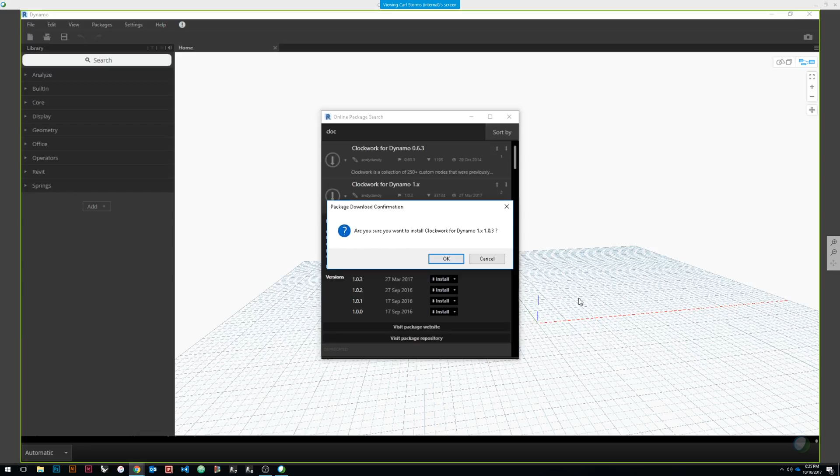If we decide we want to download that package, we simply hit install, and it asks us to confirm. We say OK, and it fires up and brings it down, doing some downloading for us. As it goes out into the web and finds that information, we get a little drop box that pops up telling us it's downloading.

Now, one of the things we find, particularly working across this interface called WebEx, is that sometimes it takes a bit slow. Anybody that's done scripting, or in this case Python scripts, it'll let you know that's involved and ask whether you want to continue. Of course we do. Then we get a gray dialog box letting us know it's downloading. Once the download completes, it turns blue and shows installed. If we go over here, we now see I have Clockwork installed in my Dynamo.

If we go back and look at manage packages, it tells me the two different packages I currently have installed, as well as the version. If we click the three little dots, it gives me some information—I can uninstall, I can show contents. If you click show contents, it tells us all the nodes included inside it. Clockwork has 370-some odd nodes, so there's quite a few in here.

So if I'm looking for a particular node, I can now search for it. I can also say show my root directory, and sometimes this comes in handy because it takes you to where it's actually located inside your local drive or database, where all the information is stored.

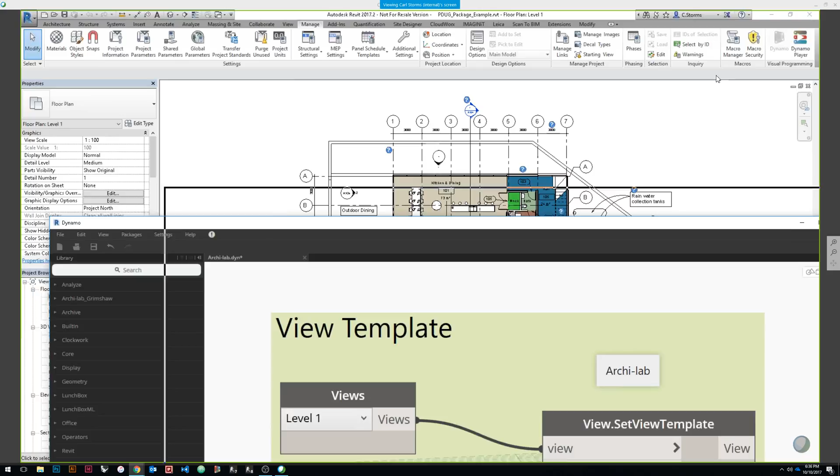Basically what I'm going to do is take all of my level 1 views and change them with our view template. I'm just going to throw this down here so we can take a look at what our level 1 view right now looks like before I run the template. Let me flip my screen so we can sort of see both.

Go ahead and hit run, and you'll see that it applied the PDUG view template. Again, not earth-shattering, but you can sort of see the benefit of doing something like this - very simple. You can set up a script, run it through the Dynamo player, and have this applied very quickly to multiple views inside of a project. Or if you're setting up a template, you can do this very quickly in play.

When you run a script inside of Dynamo, it affects Revit, so whatever's happened has happened. If I were to close out of Dynamo, whatever changes have happened have stayed there. This also means that we have the ability to simply undo a script inside of Revit as well and have it go back.

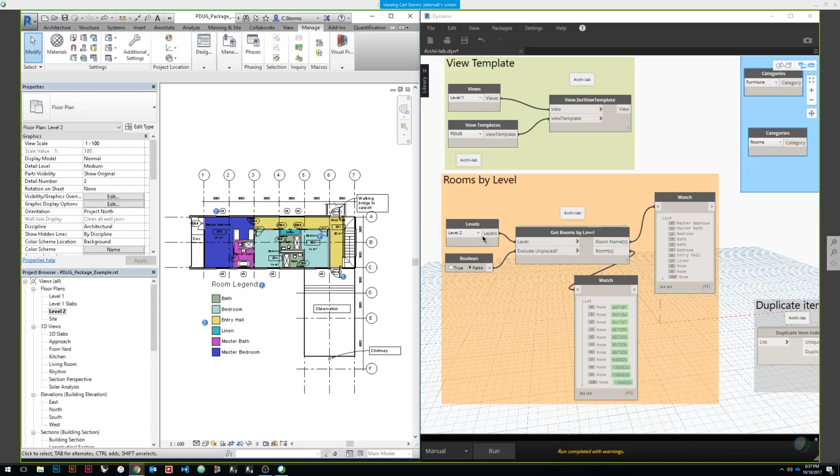The next thing that we can do, as we can see here already, is pull a bunch of room information from our project. All this simply does is go into the interface, and if I switch over to the second level, it pulls our information in. Right now you can see I ran it and went to my second level. It pulled out - what do I got - 11 different rooms.

Currently I have the exclude unplaced default. Let me turn that back on and run it again. You'll see that my list got shorter because it excluded the unplaced rooms from inside that project.

So if I had a bunch of rooms inside of my project that aren't placed, I obviously wouldn't want those on my list for whatever reason I'm pulling that information out - whether it's to put inside an Excel schedule and send out to somebody, or I need to know the information. All of that content is easily attainable with this one particular node.

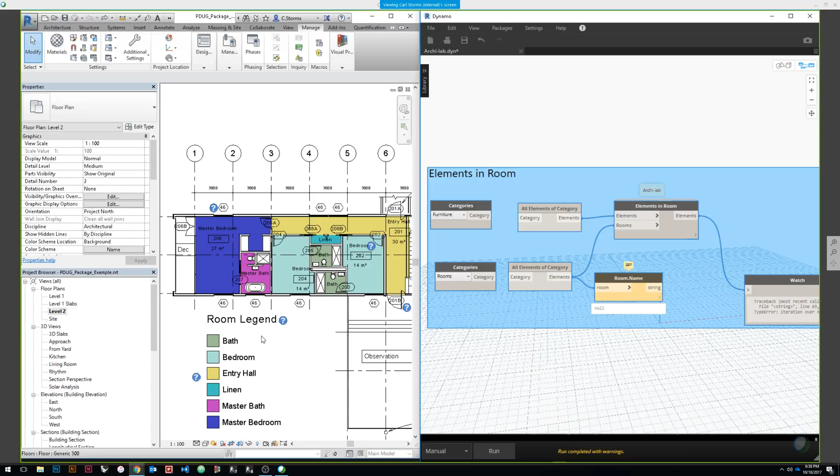This one's also pretty cool. What this allows us to do is find out what is actually inside these rooms. So if I go back to my first level again, pull up, and you can sort of see that we have definitely got some furniture

inside of our rooms, kitchen and dining, living. So if I take the furniture category and connect it up into my elements, and then take my rooms and connect it up into my elements, and then run this graph now, you'll see it's gone through and pulled out a list

of all the room names, but also over here it's given me a list that matches. So as you can see, if I go down my indices, when I get to index number 7, which is the kitchen and dining area up here, you'll see it's telling me all of the content that is inside of that room. So just because these elements have an insertion point that's inside of the room, it now knows they belong

to that room, and it's pulled all that information out, and we now have access to it. Go down to 11, that's our living room, and you can see it's pulled in the information from our living room as well. So again, a quick little node that gives us the ability to pull information that comes in place. You can imagine that if you're doing a large project, say a hospital, and you need to keep

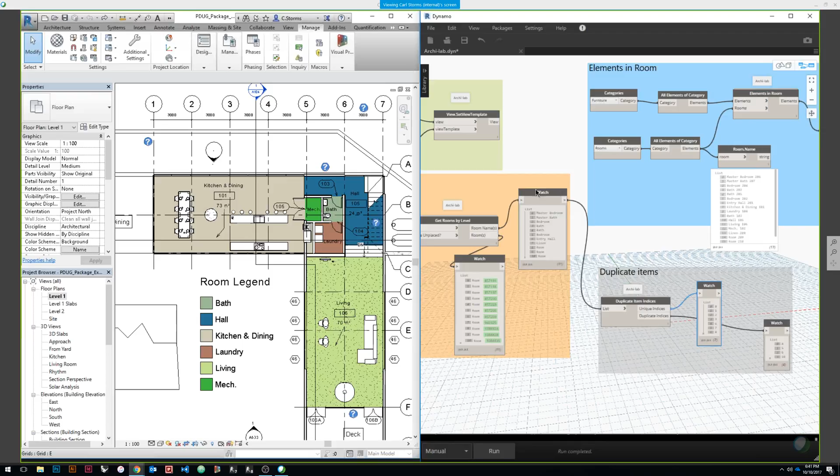And if I just scroll back here and take a look at my original list, you'll see that number 8 is unique. And now it's just going by the name, so it's called room. The first one is the unique one. And you'll see over here that 9 and 10, which are also called room, are not unique. They're a duplicate of that original.

So again, a handy little node that allows you to pull things that are duplicate out of the list very quickly. And then once you have that information, the world's your oyster with what you want to do with it.

All right, so let's take a look at the next essential package. I'm going to close out of this. And the next one is Clockwork.

Now, you've probably heard this said multiple times, I've said it many times at conferences, that while working with Dynamo is visual programming, you don't necessarily need to be a programmer to work with it, which is absolutely 100% true. However, having a logical mind and understanding how programming works and some of the things you'd find when doing coding is essential. Some of those things that come with the Clockwork package, as you see in my little group here that I've stuck together as math, are just simple things we can add that aren't out-of-the-box nodes that can make your life a little bit simpler.

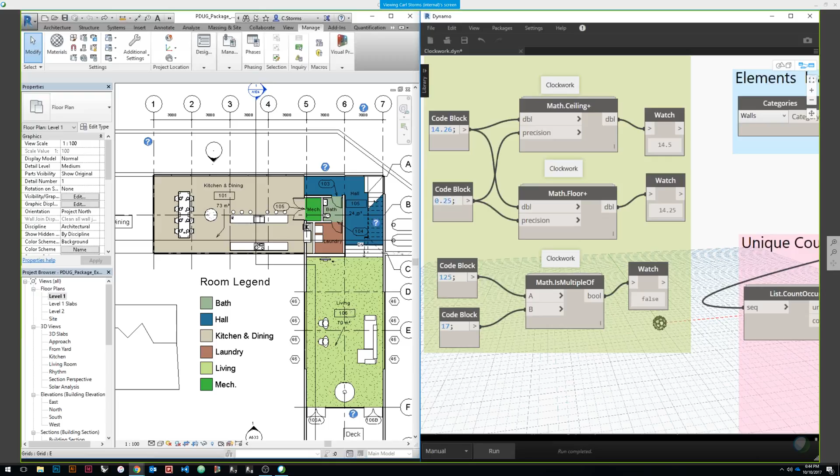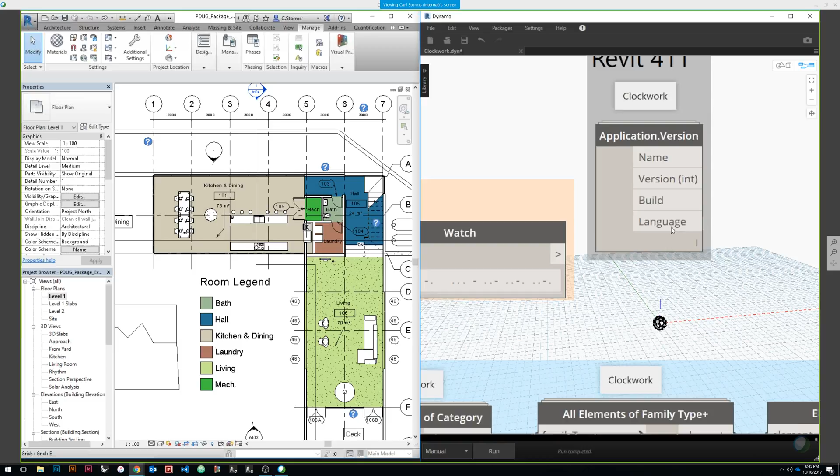Another thing that's pretty cool: anytime you see one of these nodes like this one, where there are no inputs, it just automatically goes out and reads the information. So this went out and read the current version of Revit that I'm using. If I hover over it and open up the list, you'll see it tells me I'm using Revit 2017, the version, the actual build, and the language. Sometimes this comes in handy if you're checking a whole bunch of different content and want to know where it came from, now you have the version information.

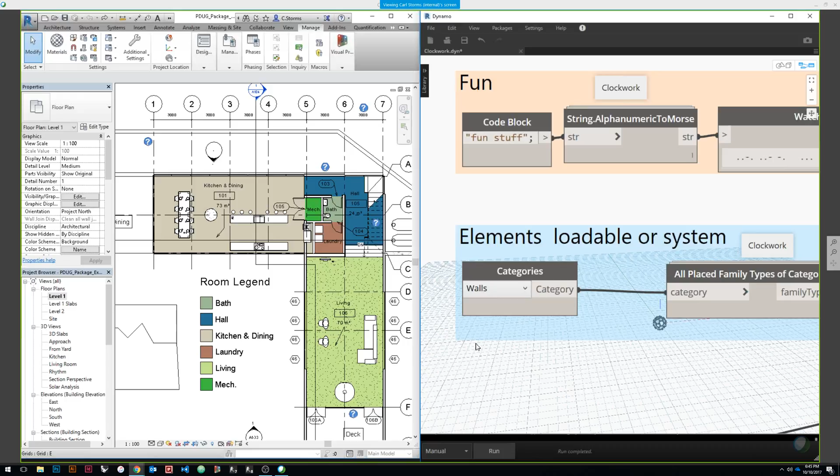This one's also pretty cool, the ability to pull elements, whether they're loadable or system. That's a big thing because by default, it's not super easy to pull system information out of Dynamo. It's usually just loadable, like furniture, doors, that sort of thing. So what I've done here is take the walls category and bring it into All Placed Family Types of Category, pulling in all of my walls. I've got all elements of family plus, which means it doesn't care whether it's loadable or system family, it pulls out all the information. If I run this again and hover over it, you'll see it shows I now have all of my wall types, pulled out of the project, which is pretty handy.

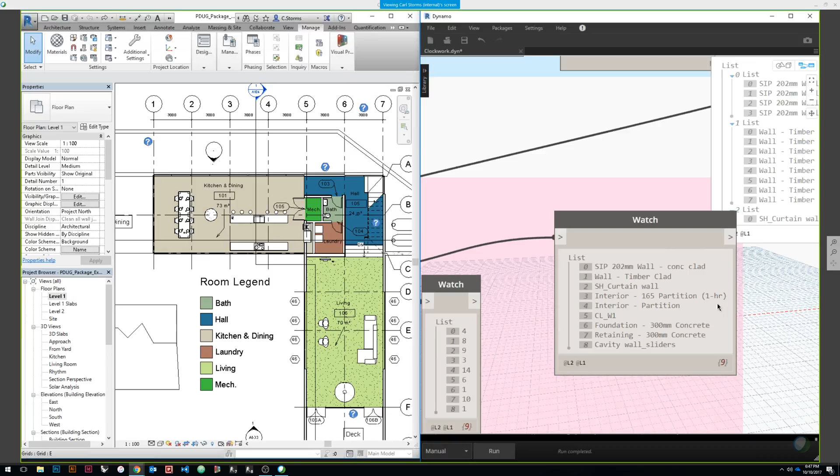Another node I use all the time is List.CountOccurrences. What this node does is two things: it takes a list, in this case our list of element names, which are all of our wall types in the project, and splits it into two categories. The first is our unique elements, telling me the 9 different wall types I have in my project. The other tells me how many occurrences of each one I have. So how many occurrences of my timber-clad wall do I have? That's index number 1, I have 8 occurrences of it. My cavity wall sliders, I've got 1. My CLW1, which is index 5, I have 6.

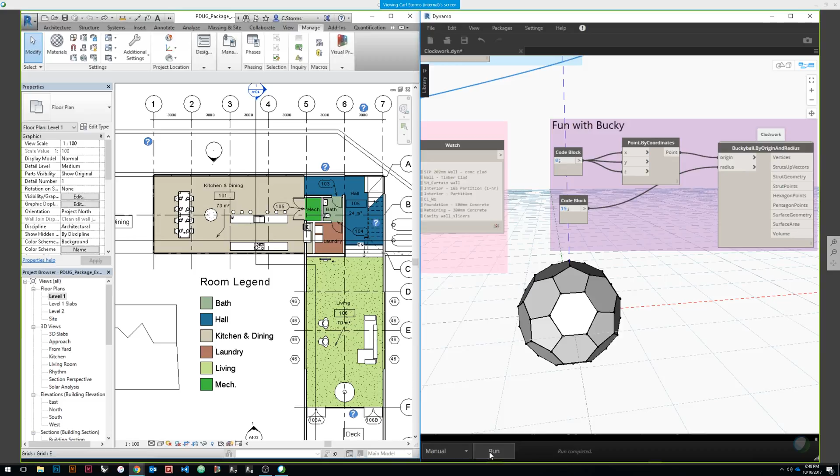And this works with any list you can input. So you can see how that can become very handy, especially combined with something that allows us to have elements that are loadable or system. You may have seen this little shape going around in the background, this is what you call a buckyball. This is another fun thing we can do: pull it into the project, and this node from Clockwork takes all that information. I throw in a radius and run it again, now I'm going to get a much bigger buckyball in place so that I can play with. Maybe not the most practical thing, but cool nonetheless.

So that quickly winds us through the world of 2 of our essential packages. Let's carry on to number 3.

Now we're going to fire up Lunchbox. A couple things that come in handy here: as you're working away inside of Dynamo, you may find that you end up with the dreaded null, no information. A lot of times if you're trying to get a list, having nulls in there is going to cause you a problem.

So what this node from Lunchbox allows us to do is take the nulls and replace them with whatever we want. I quickly put together a random list of numbers and names and all sorts of stuff inside a code block, and then said replace the null with 'null no more.' I go ahead and run that script, and I now have a new list where my nulls have been replaced with 'null no more.'

Probably not what you would actually use, but you can see you have the ability to replace that null with whatever it needs to be replaced with to make that list usable. Out of the box, there are definitely nodes, one called clean, that will just remove the nulls from the list altogether, and sometimes that's what you want, but sometimes you need something a little bit more.

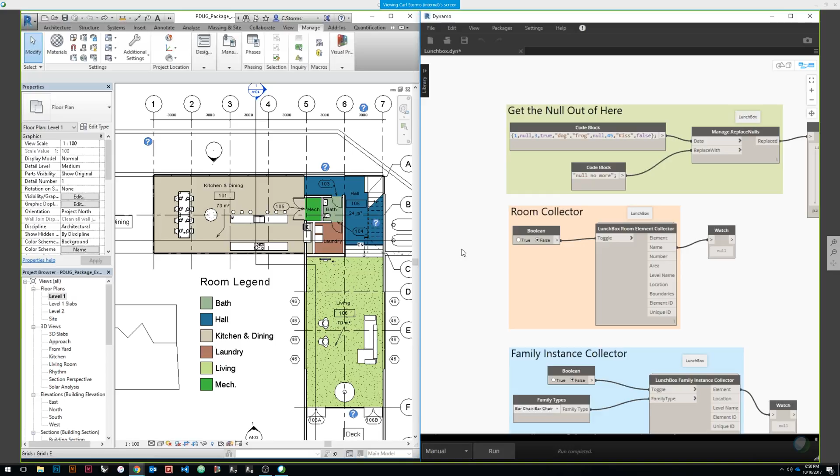Some other cool stuff we can do with our friend here, the lunchbox: room collector. This is a really cool node, and a lot of these collector nodes that different people make inside of their packages are super handy because they gather a whole bunch of information, and they allow you to, at any point, gather information. The only input required in this case is a toggle, to tell it whether or not you want to actually run that information.

So if I turn my toggle to true, and I go ahead and give that a run, the first thing you'll notice is that it actually pulls the information into my project. So now I have the rooms inside the project, so we have access to the geometry of the rooms. But more importantly, you see we've got the names, numbers, area, unique ID. Any of that stuff is now at our fingertips, and we have the ability to pull it in and take a look.

Likewise, we can now do similar things with family instances. As you can imagine, this will collect information on instances of families inside of our project. Again, two inputs here, whether or not it's true or false, so true will activate the node, and then family types for the type of family we want. So I've chosen our bar chair, which are these little guys up here.

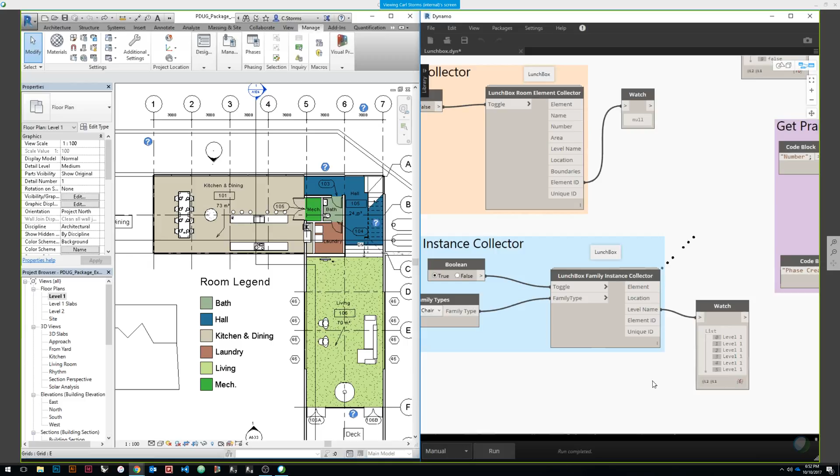Select that to true, run it, and you'll see that all of the information about my rooms is now gone because I turned that to false, and now I just have the location of our chairs. You'll see I can change the element, the location, the level they're on, unique ID, element ID—all of that information is now available to me from this one simple node that collects all this information. As I change things inside of the Revit model, run this again, it pulls in that information.

So we've always got the latest and greatest information in regards to that. We also have the ability to get parameter values, so that means we can pull information from any parameter inside of our element.

So I pull my element, and I'm just going to run this guy again to get my room information. Now I've got all of my room information. I run again, and I now have all of my room numbers that I want, when it was created. Wrong one. That's it, there we go. Brings in the information. So again, a way to pull values and parameter information through that's not quite the same as what we get with out-of-the-box nodes.

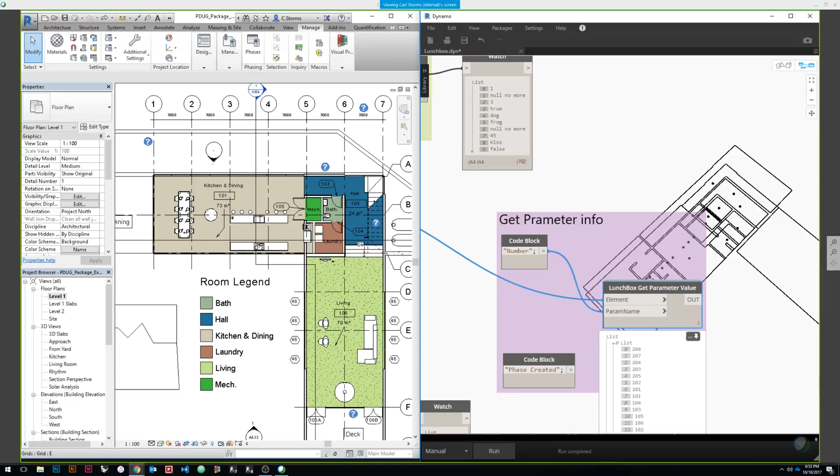Lunchbox has been around for a long time, so this is just a very small sampling of what you can get from there, but it gives you an idea of some of the things you can use, perhaps on an everyday use case. Three down, two to go.

Now we're going to take a look at rhythm.

So a couple things here. First, what we like to call a teachable moment. As people that create these packages make updates, adjust for newer versions of Revit, make changes, you'll see from time to time you may find that you had a graph that worked awesome, everything in it was perfect, good to go, and then you go open it up and you get this. Anytime you see a red node, that means that node no longer exists.

So that can mean two things. One, I don't have the rhythm package. But because this one isn't red, and because if I scroll down here, you see I do have the rhythm package, so that's not it. So the second option, once we found out that we do have the package, is that this came from an older or newer version.

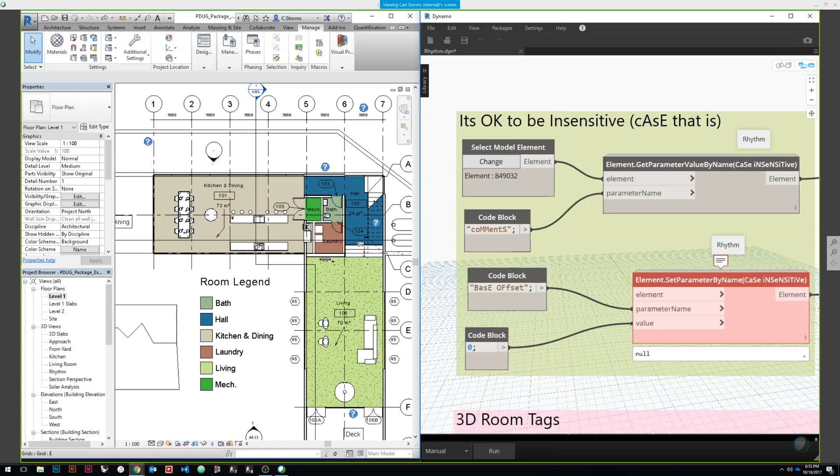But I thought I'd leave it in so that if you ever got a red node, you understand what it's about. The other one is still in play. And what I like about these ones, as you can see, is that they're case insensitive, so whatever the parameter name is, it doesn't matter.

The majority of times when you're dealing with this, you have to make sure the parameter—in this case comments—is exactly right. So even though I've spelled it all weird this way, if I go ahead and hit run, you can see that the comment is PDUG, which is the wall I've selected, and it tells me the information. If I go back into my Revit file and select the wall, you'll see in the comments, PDUG.

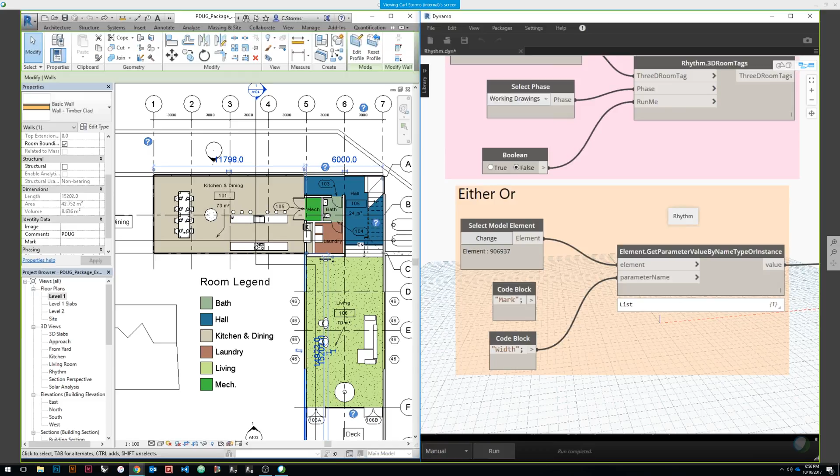Another one that's pretty cool is this guy here: get parameter value by instance or type. Comes in super handy because it will get the parameter no matter whether it's an instance-type parameter or a type-based parameter. So in this case I've selected a door, and I put in my mark parameter, hit run, and you can see it gives me the mark.

So this guy right here—if I change it to width, which is a type parameter, hit run, it gives me the information. I select edit type, pull it over and scroll down, and we see that we've got our width here. So again, doesn't seem like a big thing, and yes, out of the box you can get type-based information and instance-based information, but this one node allows you to do both. It's one node that gives you two times the information.

This one's pretty cool. What this allows us to do with a family—when you download the rhythm package, I'll just quickly show you. When you download the rhythm package, inside the extras—this is it right here—is the 3D room tag family that you need to make this next script work.

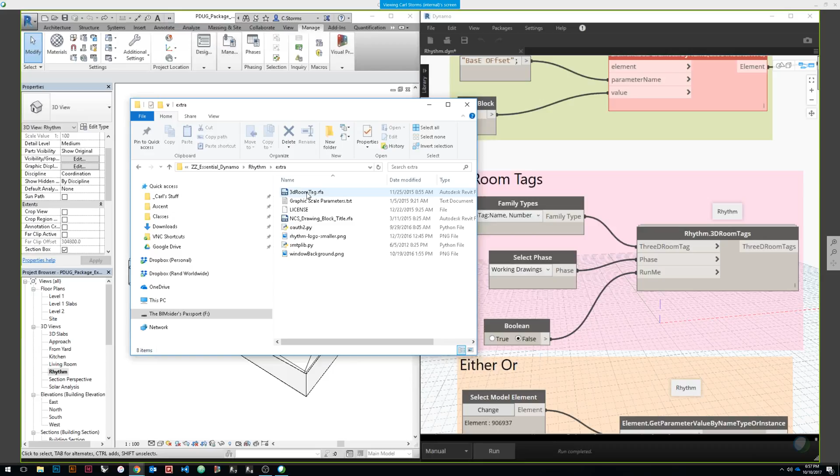Essentially what it does is take the information from the out-of-the-box room tag, in this case the name and the number, and creates it with 3D text so you can see that information in 3D. So as you can see right now, no room names, no numbers. Level 1, we've got our names and our numbers.

I go ahead and change that to true, run it, and we now see that we have our 3D names and numbers inside of a room. So again, you can see how this can become handy for a presentation view, showing the client we want to see the 3D stuff, but we want to know where we're working. We have the ability to take a look at our 3D room tags.

Something else that's kind of cool is the ability, in this case, to update or change our arrowhead design. As you can see, it can change just about any arrowhead that you want—text notes, tags, room tags, door tags, window tags, wall tags. All you need to do is give it the arrowhead type. Now this is just a simple string input.

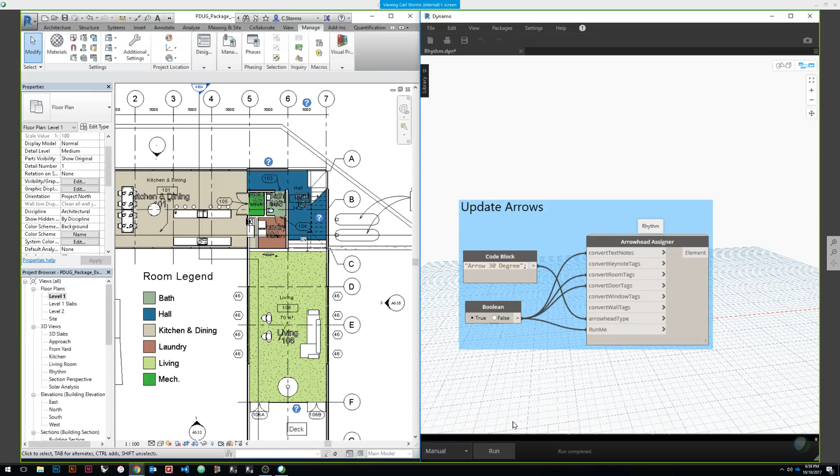So you just need to have the name of the arrowhead as it appears inside of Revit, and then we of course need our Boolean to tell it true so it runs. We scroll in here a little bit to see a bunch of arrowheads. Run. And of course, if I used a different arrowhead, let's try 15 degrees, and they change to 15 degrees. Again, not an earth-shattering difference, but it allows us to show what we've got in there.

And if I were to go into... now we've got our filled, so it changed the rooms, changed the doors, and also changed our text. So again, perhaps you need to change a bunch of arrowheads really quickly—there you go, you're set up and off to the races. Imagine going through all the different views inside a large project trying to find that. That's a couple clicks and you're done for the entire project.

All right, one more to go.

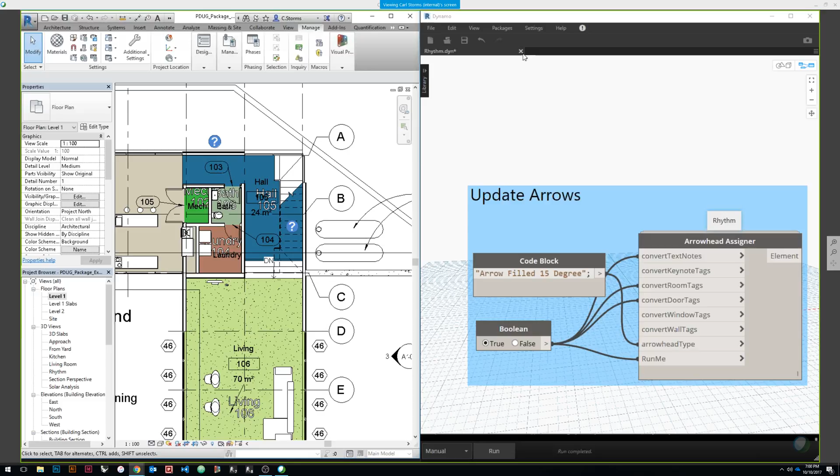Oops, I didn't mean to close that.

Give me one second. And the last one that we're going to take a look at is Spring Nodes.

So a couple things - perhaps you're the person in charge of taking a look and keeping things up to snuff. Once your Revit files start to get really big, we may have a problem. So now we can see how big a file is, and this one has nothing to do with the actual open file that I have.

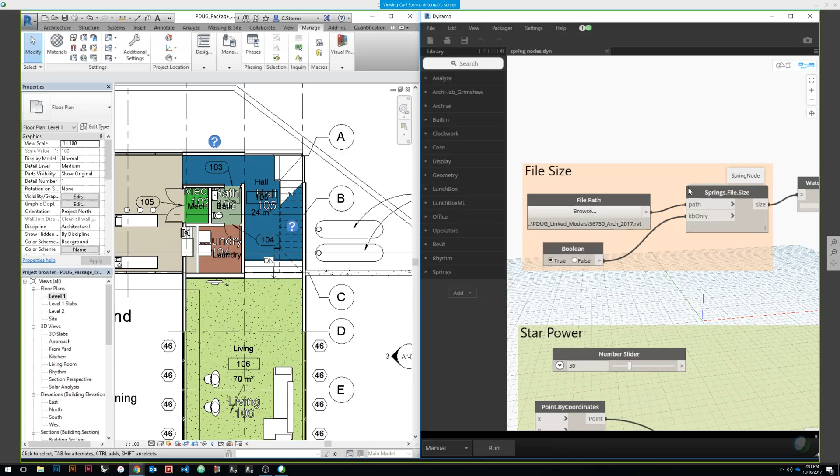We actually just browse to wherever our Revit file is stored. In this case, I select File, and I say Run. And it tells me the size in kilobytes - 29 megabytes, that's fine.

We're good, but if you get up into gigabytes or 400 or 500 megabytes, perhaps it's time to take a look. And you can see I didn't have to open up the Revit file to do that - I could open the script and check a whole bunch of files very quickly by just pulling it through and running it in the background.

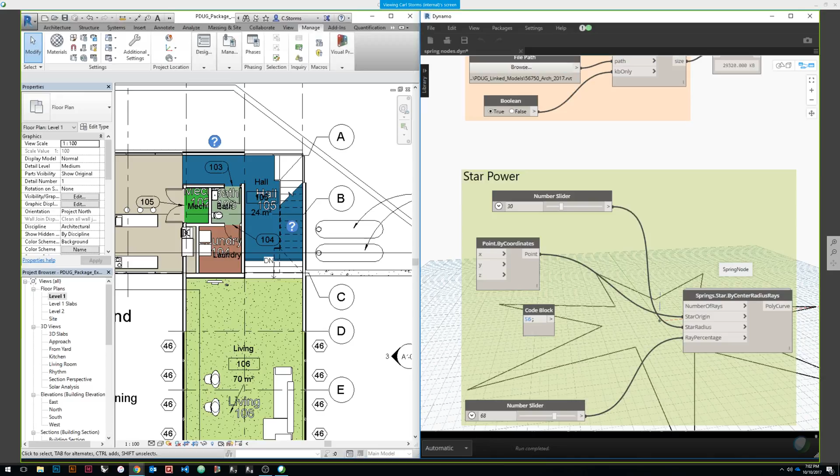Something else, a little bit of fun - you can probably see in the background here, I've got this little star. I can start tweaking around, throw this on automatic, adjust the star, adjust the radius. Again, some of these probably don't have the most practical use, but it shows you some of the stuff that you can do with Dynamo - pretty much the sky's the limit. Plus, I think it's kind of pretty cool.

This next one's pretty cool as well. What this allows you to do - since I don't need this, I'm going to make this full screen now - is it allows us to actually take and review a Revit interference check from the exported model. So you go into Revit, you run an interference check, you can export it out as an HTML file. This will run that HTML script and tell you all the information about it.

In this particular instance, I can browse through and check one of my HTML files. So I've got a couple of different ones - this one's about walls. I say OK, I hit run, and it tells me all of my different things - the clash categories. I'm clashing walls against railings - do I have any issues? I don't have any issues. There's one case where I do have walls running into railings, and there's 2 clashes.

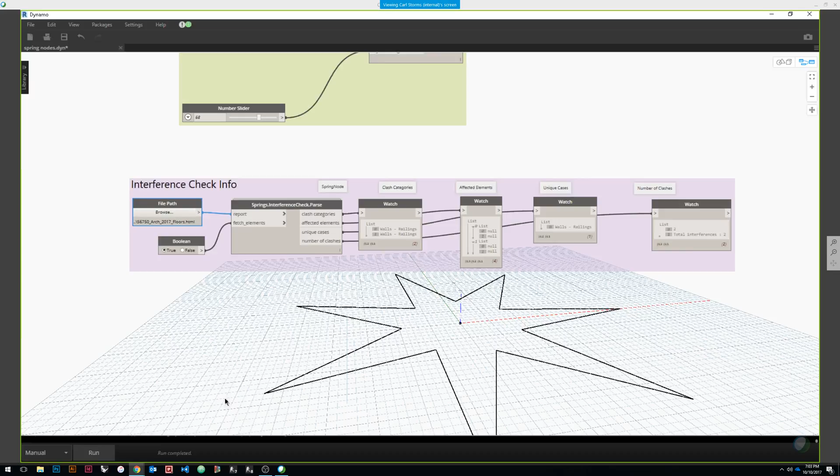And if I go back to my floors option, run that again, you can see that I now have 7 different issues. I have floors running into stairs and floors running into structural columns. I have some issues with floors and stairs - 3 clashes - and some issues with floors and structural columns - 4 clashes. Now, 'clashes' is kind of a hard word, at least for me.

Usually when I think clashes, I think of some of the stuff that we can get working with Navisworks. The interference checker inside of Revit is not meant to replace Navisworks and doesn't quite give you the same functionality, but it does give you some rudimentary information.

As you can see, I clearly have some structural columns that are interfering with some of my floors. Now I can make that information - I can run this again. This is one of those things that you could run in the background on a weekly or monthly basis to take a look at it and have it sort of as a dashboard type of thing, instead of actually going in and running a report inside of each active project.

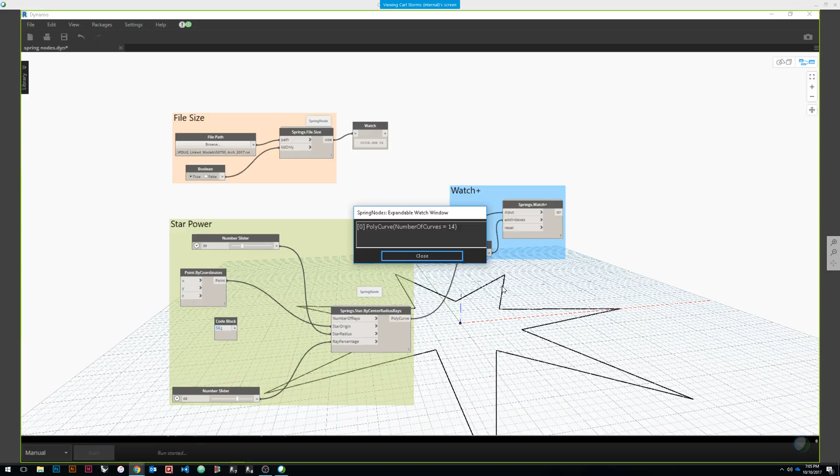Another thing that this does is allows this Watch Plus to take information and take a look at it. So if I were to pull, let's just say, my poly curves - it's not that exciting, but what this does is it allows us to give a pop-up expandable window. It doesn't seem like a big thing, but sometimes it's much easier to read and get the information out from this. I come down and I pull out the information from within my clash categories.

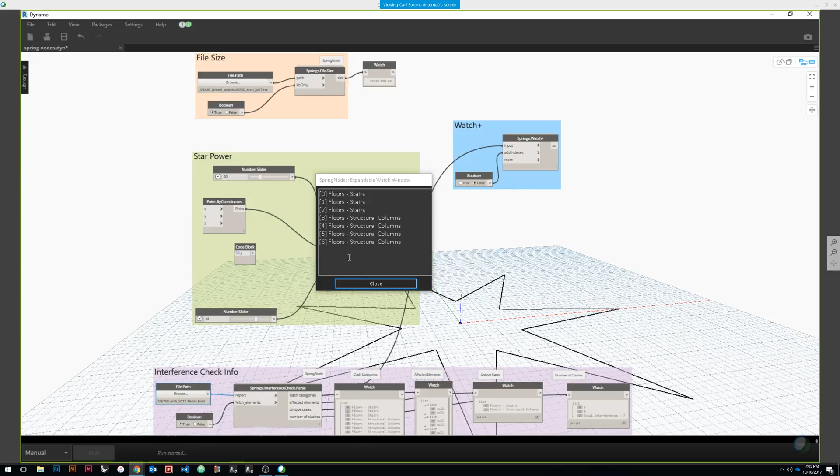Again, I put that in there, go ahead and run it, and I've got my information. I can resize this window for whatever purpose I need it to be. I can also turn on or off the indices - so as you see right now, I've got 0, 1, 2, 3, up to 6. If those aren't needed for whatever reason, I can turn off the indices, run this again, and I get the same pop-up without that information. So again, it's just a way to have a different output or display of the information that we're running through Dynamo and take a look at what it is and what it does for us.

All right, so that is our 5 essential packages.

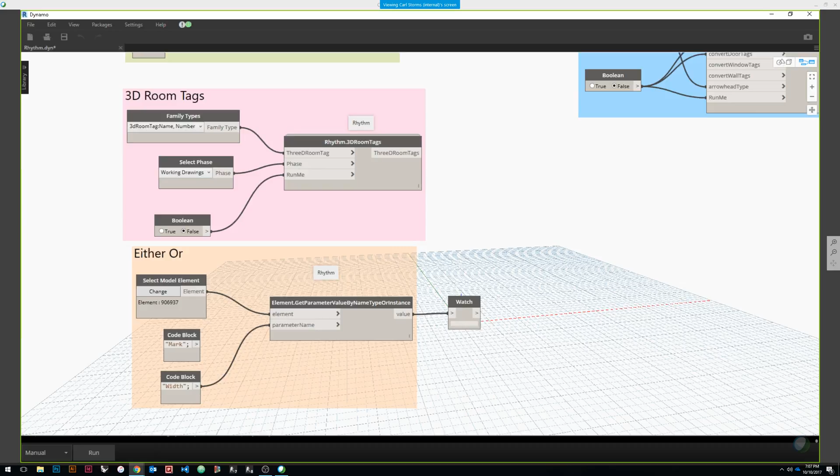Was there any other questions? Can you pull the file path of the current Revit project through a node? Is there a node that does that? Yes, there is. Off the top of my head, I can't remember which one it is. I believe it's in the Clockwork as well. They've got a whole list of ones that pull that, as well as, or was it Lunchbox? Now I'm forgetting. But yes, I know there is, in fact, a node that does that. That'll pull the file path of where your particular current Revit project is stored. Thank you.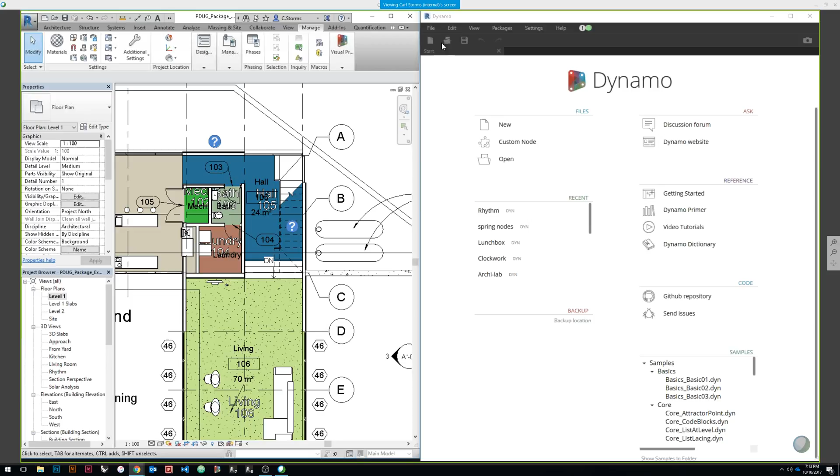All right, we're good to go. Let's open up the ampersand. You'll notice that I now have many more packages installed. That's what happens when I swapped over and brought in that other location. It pulled in all those other packages that I have installed.

Now, this particular package really has nothing to do with the Revit file that I have open, so I'm going to make it full size. This package is done by Colin McCrone, who does a lot of great stuff with Dynamo, and he really does a lot of cool things when it comes to panels and panel visualization. This is just a small bit of what can be done with his nodes and his knowledge.

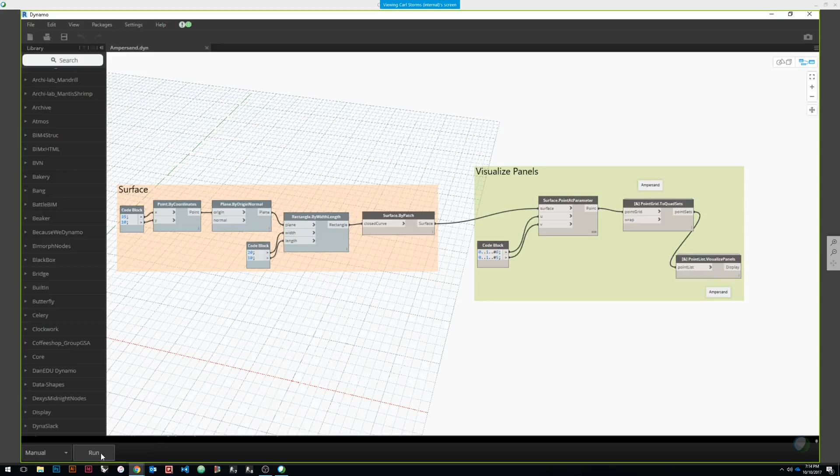So if I quickly go ahead and run this, down here in the background, you'll see we now have a list of panels, 8 by 5. You'll also notice that we have some wash. What's happening is the actual surface, or where the panel would be, is in conflict with the color.

So what we can do is we can just turn one of them off. If I just go up to my surface by patch, right click, turn off the preview, then it turned off those grays, and now you can see a little more clearly where each particular panel represents or lives, because there is a bright colored 4-point square rectangle, if it didn't have to be square, which these ones are, to show you where that is.

One of the few things that comes from that ampersand package, but it's one of the ones that I find most useful, especially if you're working with facades or panelization. And again, plenty more where that came from if you check out Colin's class or any of his talks, any of the many conferences he's been at. But that is ampersand. You'll see up here a bunch of different stuff inside of ampersand.

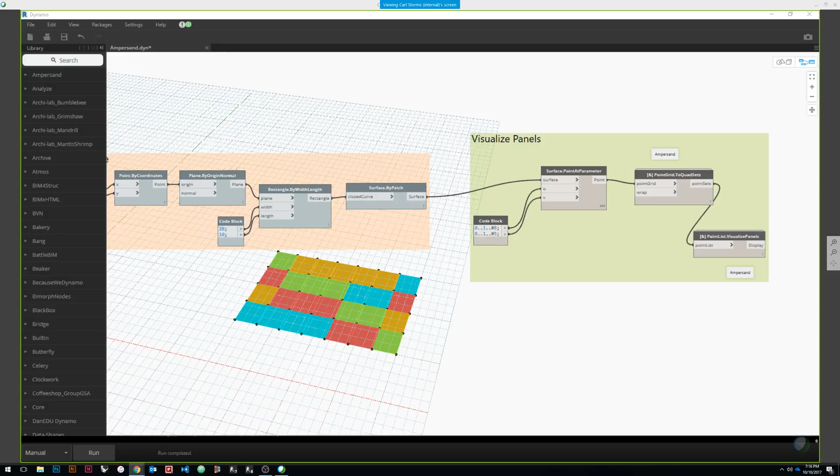So next is bakery. Bakery is a package put together by Luke from What Revit Wants. Bakery is huge, it's right around the 500 node mark. It used to be dependent on a whole bunch of packages. I think it probably technically still is. And every time you had to update it, it was a real pain to update it.

What Luke has done, and it's different than any other package I've come across, is that when you download it - I currently have it installed, so you see there's a whole bunch of different libraries or locations where I can put this in here - when you download it, you're only going to see one node. There's only going to be a single node. And when you click on that single node and put it inside your graph, it's going to give you instructions on how to actually install the package.

Once you've installed the package, the node goes away. But it basically tells you where to find the package you've downloaded and how to take it out, unzip it, and put it in the proper location to have access to all the nodes. So if you download Bakery and think, why is there only one node and nothing there? Put the one node on the canvas, run the graph, it will walk you through, and then you'll have your 500 plus nodes available to you.

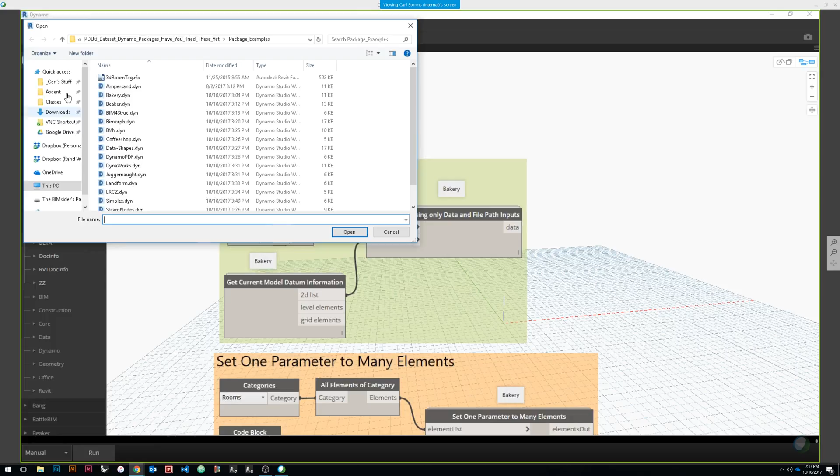Some of the stuff we're looking for is information about what's going on with our particular project. So what this does is write an Excel file with a bunch of information about this project. All you need to do is first browse to where you want to save the file and give it a name.

The next thing is pull the information that you want - all of my grid elements, all of my level elements, or just my 2D list, so all of my 2D content from the project. I go ahead and say run, it's going to fire up Excel, and it pulls up this Excel list of all this information based on this particular project I have in place.

Now, it's a predefined set of information, so some of it may be useful, some not. You can see we've got some of those dreaded null values in place. But basically it's telling us our project base point, are there any grids - we've got our A grid, B grid, C, D, E, F, and G, level names, elevations, and our start points. We can sanitize this list as we go through to make it more palatable, but you can see what we can do when we pull that information out.

If I close this out and try my level elements instead, it's going to pull up that same thing, and now it's giving me all of my level information - where each level is: level 1 is at 0, 2700, 6000, 3000, 800, 5500. So it's giving us all of our level information. You can see how this node could be very quick to pull this information - I call it quick and dirty document information - to pull that stuff out of your project, get a look at it, and have it in an Excel spreadsheet so it can be easily shared.

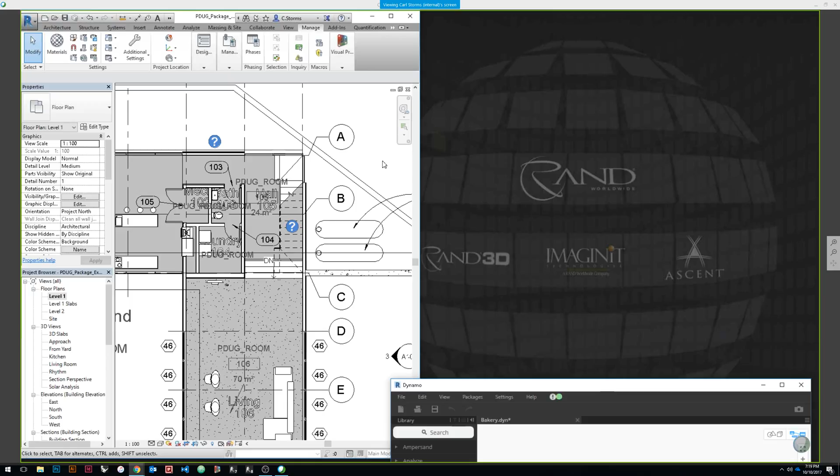The next one's pretty cool. It allows us to put a whole bunch of information at once. So we select one element, we select the parameter that we want to change, and we change a bunch of parameters at once. Let me take this back and place it. Let me unrun my script so we don't ruin the surprise. But we see what we've got here.

So what I've got on plan is I've taken all of my rooms, and I'm going to change all of the names. So every name is going to be PDUG_ROOM, and of course it's the name that I'm changing. I go ahead and run that, and you'll see that all of my rooms have now changed to that name. Probably wouldn't want to use that particular example, but it shows you the power of what it does and how it can change one parameter in many places quickly.

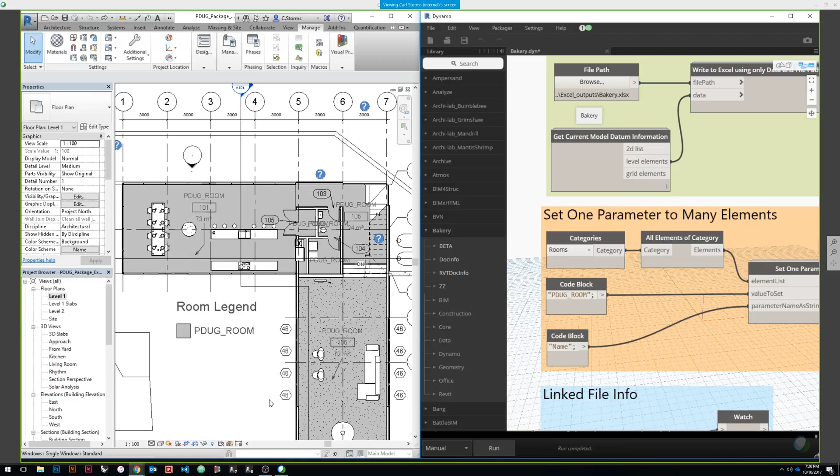So if you had to change something very quickly that happened to occur in 100 spots - say all the chairs went from Herman Miller to Walmart, I don't know why they would do that, but they did - you can change that manufacturing spec of 100 chairs very quickly using that information.

We also have information about our linked file. And where is my linked file? If I had a linked file, which I thought I did, I'll just quickly throw it in here. So now I've linked a project inside here. Now it's not playing nice - the joys of a live demo.

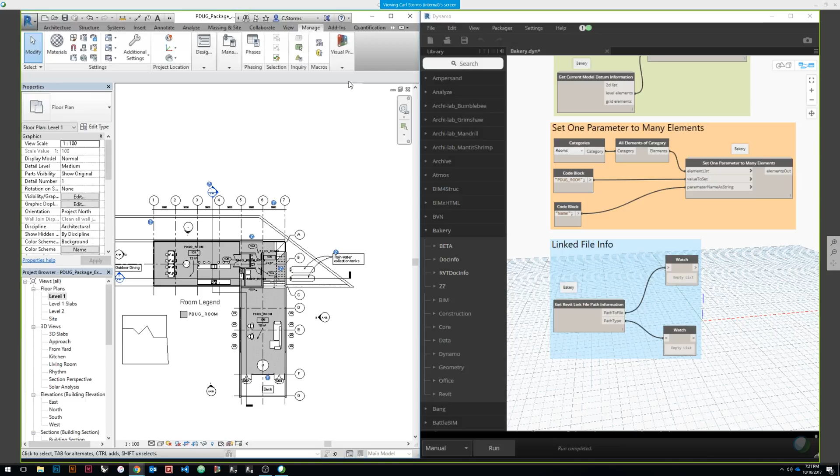But what it's supposed to do, similar to the question we had, except it deals with our linked project, is pull in the information from that linked file, and we are able to see it right away. I'm going to try one more time to make sure that we've got that linked.

There we go, now you'll see that I've got that. That happens from time to time when you're working with a graph—you may have to restart it. But you can see it tells me where that file is located. If I scroll across, I can see all of it, as well as whether it's relative or absolute. So it'll pull through the information, all of the linked files inside your project. If it's a large project with 20 files linked, it would give you the information on all 20.

All right, carrying on. Gonna have to speed up here as I can see we're running out of time quickly. Next one is one called Beaker.

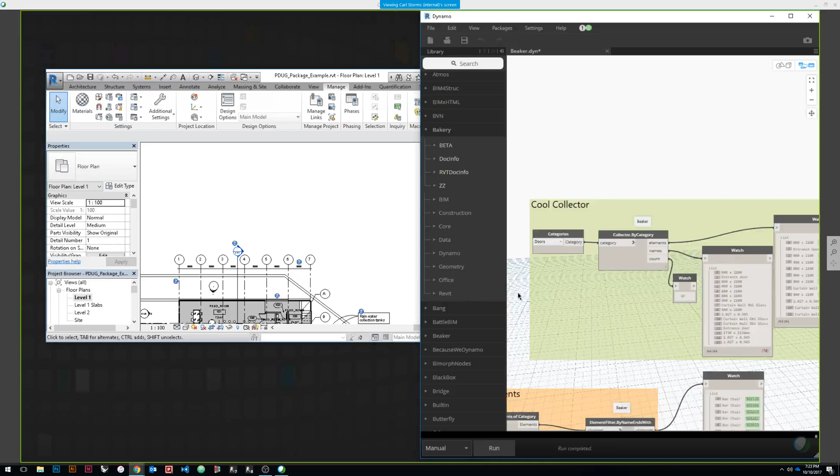So the first one, I call it Cool Collector. It'll collect any category and give us information about that category. I've currently got it set to doors. I say OK, I run this through, and as you can see, it's giving me all of my elements—the name of the door, its actual element ID, the name of each door, and how many doors I have in my project. And that will work for any category, rooms, whatever you want to think of, it allows you to do that.

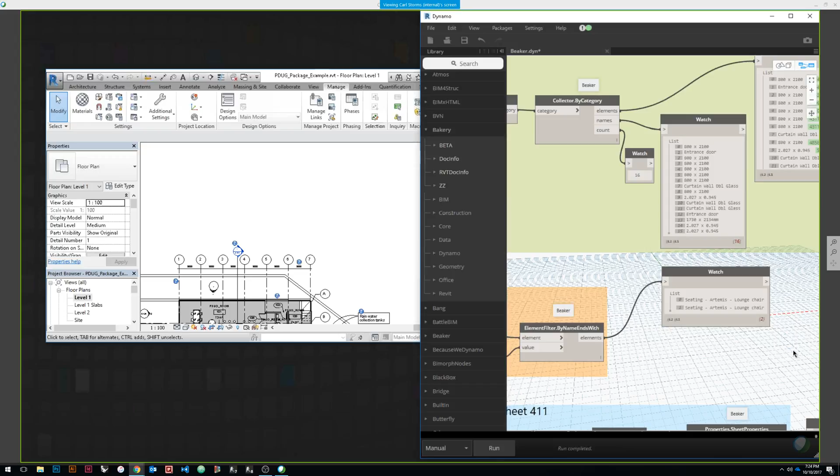Another cool node that allows us to filter things. Whatever our element is, I've chosen category of furniture. The value I'm filtering by is chair. I hit run, and you'll see I have all of the chairs. Now I happen to know that there are a few that have a lowercase c. If I run that again, you can see it gives me the information where there is a lowercase c in that. So it does get filtered very specifically between what you're looking for.

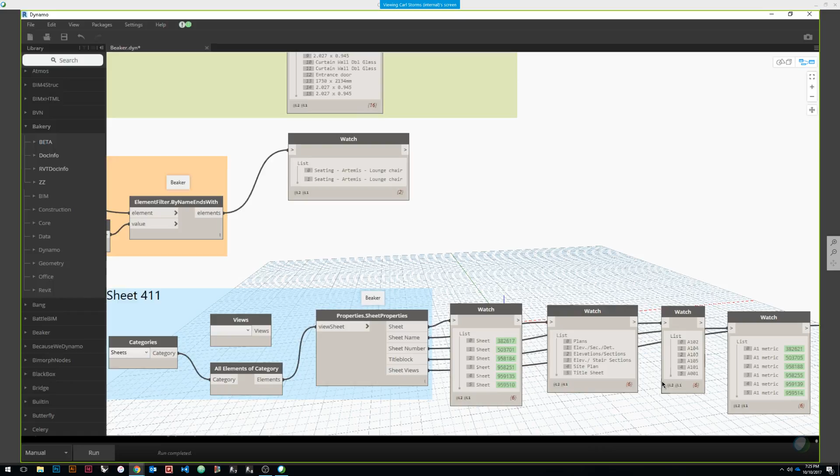Another one that's handy, it's another collector. It pulls out information about all the sheets inside of our project. If I go ahead and run this, you can see it tells us the sheet—it gives me the actual element ID. Sometimes when you're working inside of Dynamo, you need the actual element ID. It gives me the sheet names, the sheet numbers, the title blocks. And it also tells me all of the views that are on each sheet. So again, handy information that you may need when you're creating title blocks, sheets, what have you, all coming from one very handy node.

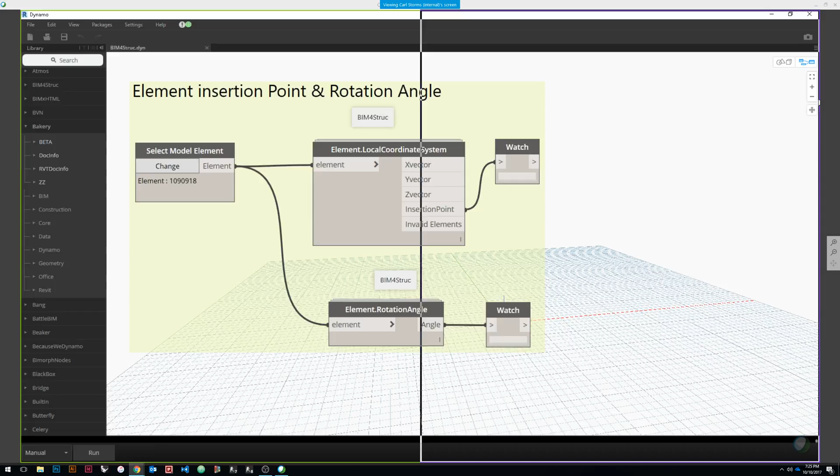The next one is called BIM4Struc. There are 4 nodes that are part of this package. As the name might suggest, a lot of them have to do with working with structural elements. But this one is just a general productivity node, and I think it's kind of cool.

So I can choose model element, choose my model element, run, and then it gives me the information about it. Where's my X vector, my Y vector, my Z vector? In this case, the insertion point. There's lots of times where we need to place something or find out where an element is placed by insertion point. I can also find out what it's rotated. As you can see by my 89.99999, this was obviously created in metric and converted to imperial or vice versa, so you don't have that nice 90 degrees. Quick and dirty, really handy, and finding that insertion point can be very handy as you're working your way through.

The Bimorph nodes.

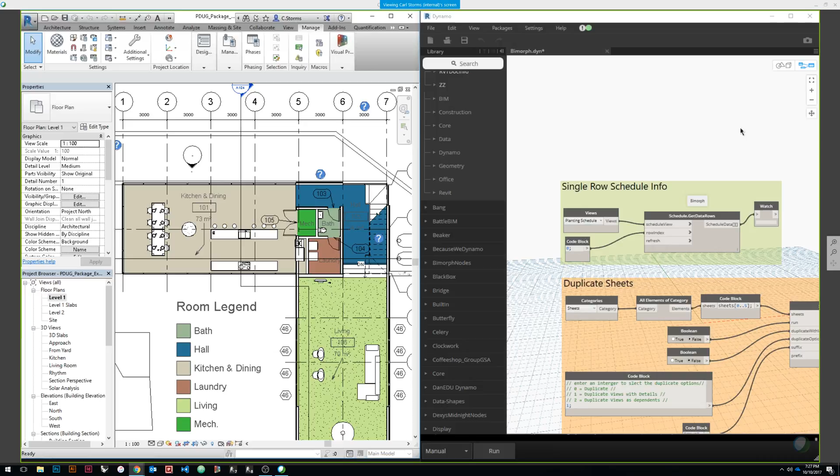So we can pull through individual schedule information. If you have a schedule inside of Revit, and for whatever reason you only need the information off of a single row, this allows you to pull that information. So you can see I've got my planting schedule. I want row 0, so basically the headings. I go ahead and run that, and it pulls me the information from that type mark, common name, count. If I were to change this to number 1, run it again, it's now giving me the information one row down, the first line through. So there can certainly be times where you need just individual information from a schedule without pulling the whole schedule.

You can do that. Another really cool node allows us to duplicate sheets. If I scroll down into my package, you'll see, of course I ran it, so I've already got it.

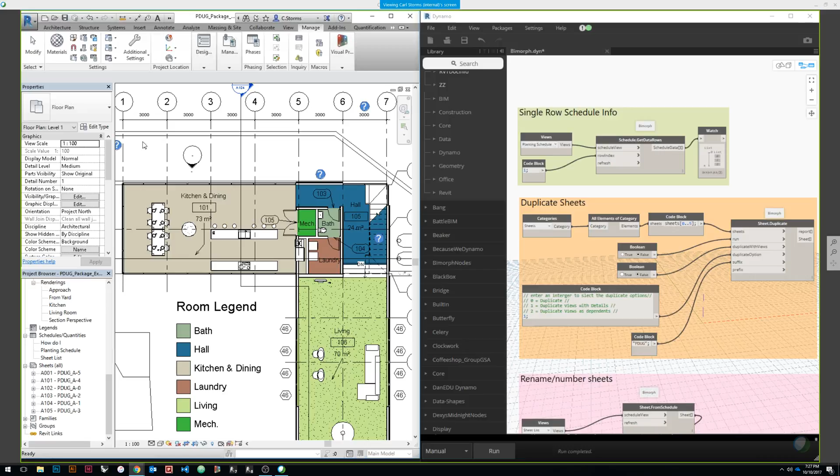What this allows us to do is to duplicate sheets. So what are my sheets? I want all of the sheets, 0 to 5, which means 6 sheets. I have 6 sheets inside my project. Do I want to run it? True or false, duplicate with views? Not only does it duplicate, but it duplicates the views. What are my duplicate options?

I wrote a little code block here to remind myself what we're doing. If I put 1 in there, it duplicates the detail. If I put 2, it duplicates its dependent. If I put 0, it just duplicates. So you choose which one you want. I'm going to duplicate with detail, and then I can add a suffix or a prefix, so my PDUG.

If I say OK, I can turn these both on. As you can see, I've got my packages down there. I'm just going to unplug this one. Run.

And I now have created, excuse me, duplicate sheets with the suffix that I was looking for. It took 30 seconds to run that script. Imagine how much quicker this would be than doing it by hand, especially if you had 100 sheets that you needed to recreate.

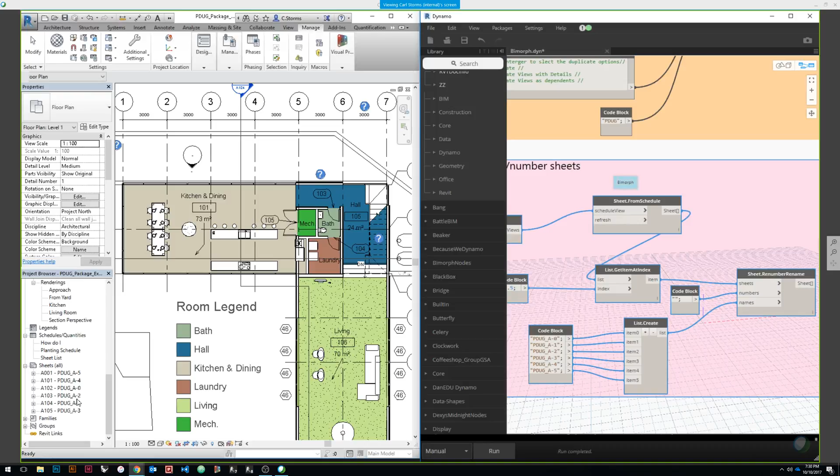And now if I run this, you'll see that it'll rename all of my sheet numbers down here with my pdug underscore and what have you. You'll see it's renamed all of my sheets. So again, some handy things that come into play when you're working with project maintenance in the back end.

BVN, another couple of handy things to have in play.

A lot of times when we're going through and working with our project, we want to make sure our rooms are nicely centered as well as our room tags. So these 2 nodes do 2 things: one, they center the tag inside the room, as well as centering the room. The reason we want to center the room location is because the tag reads the center of the room location. That's why we use both of these. I can turn these to true, and you'll see I've got some tags that are definitely not centered.

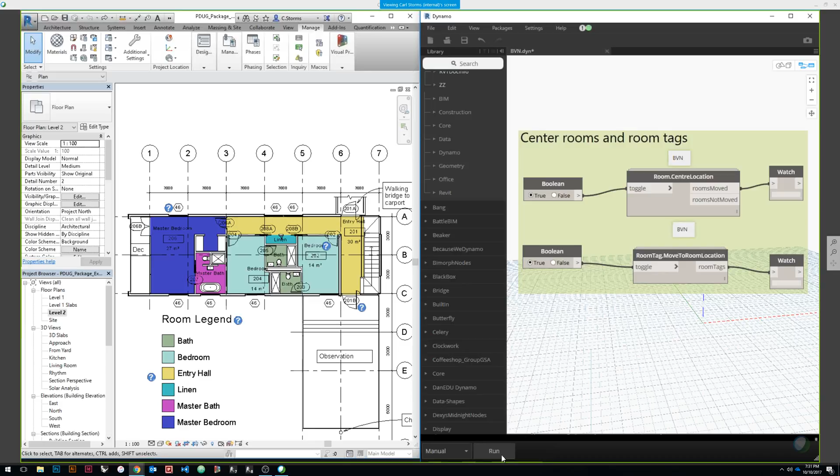Go ahead and run that in place. And I now have my room name centered. We also have the ability—again, it ran it by default—I don't want to spoil all the fun.

So this renumbers all of our doors based on our room, and we can have a prefix, so P, and then a separator, I have a dash. I go ahead and run that.

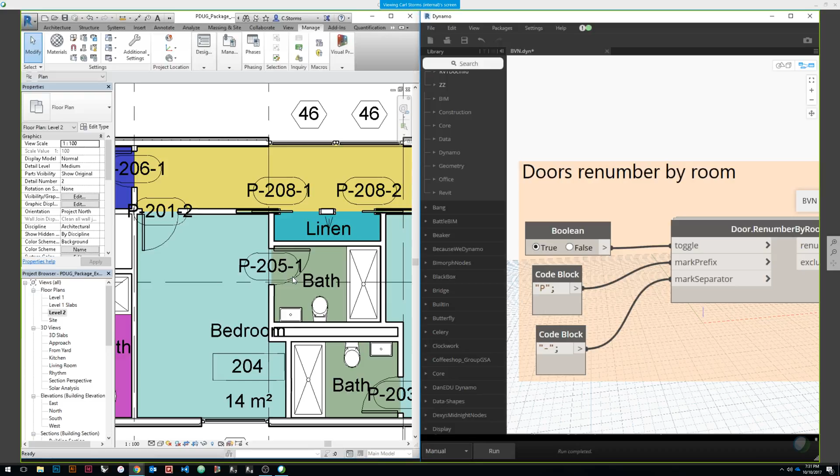And you'll see all of our doors are now based on the room number. So 205, 201-2, 201, this is the hall, 201-4-3. You can see how it very quickly renumbers those based on a very common requirement to have the door numbers based off of the room.

This coffee shop one's fairly new. When it came out, when I was taking a look at the BILT North America, it's just a couple little simple nodes, but this one's pretty handy, and I can see it coming into use.

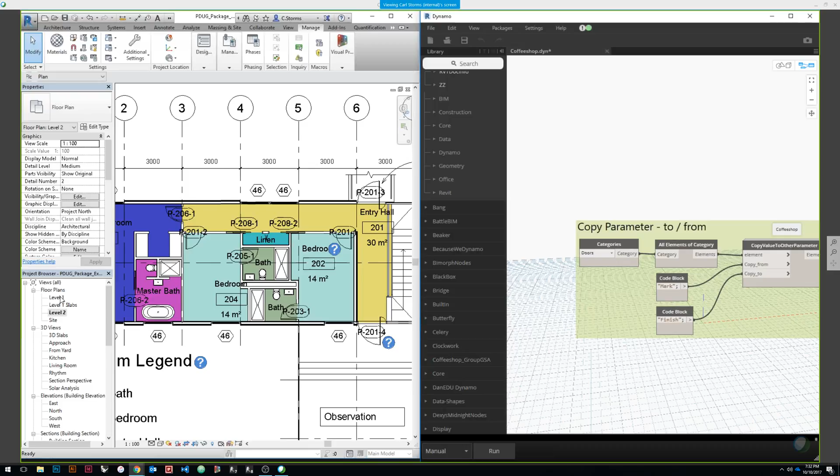Basically what it does is it simply copies parameter information from one spot to another. In this case, I'm copying information from the door mark to the door finish. If I select this particular door, you'll see there is a mark, but there is nothing in the finish. I go ahead and run this, and you'll now see that the information that was in the mark category is now in the finish category.

Again, not earth-shattering, but you can see how something like that, a simple little node, could make your life easy if you had to copy a ton of information over inside of Revit.

Data Shapes is a super cool package that really might be becoming one of the essential packages. One of the things about this is it sometimes tends to scare people a little bit because the nodes are quite large and there's lots of stuff. But what this allows us to do is pull information out of the project and gives us a pop-up window.

Right inside of Revit, we can use it to input information without going back into Dynamo. This comes in handy if we're using the Dynamo player, or if we just want more input ability inside of Revit itself. It also gives us the ability to add logos to our pop-up, so if you're creating content for your company library and you want it branded, you can do it this way.

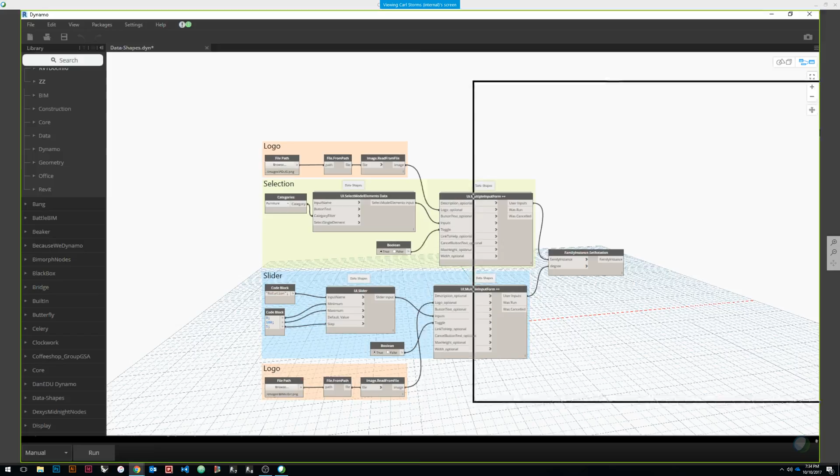This is from my other session at BILT North America, where I created a script to adjust some furniture. This will showcase the fact that we have pop-ups that come into play. So let me make this half screen again, nothing selected, and I'll go ahead and run this script.

As you can see, it popped up my little box here. I've got the little BIM Cider logo. I choose how much I want to rotate furniture, 50 degrees, and I set the value. Then it pops up the next interface, where I want to select my furniture. I say select furniture, choose my pieces, and I don't have to hold down control, I can select as many as I want. The key thing is I have to hit this finish button up here that's sort of hiding. Then I set my value, and it rotated my furniture.

The rotating furniture was kind of cool, but the whole point is the stuff we can do with this Data Shapes node by having those pop-ups come into place, and the fact that we can brand them with a logo and do whatever we want. That's really just the tip of the iceberg of what you can do with the Data Shapes node. It's definitely one to take a look at, as they all are, but that one was definitely moving its way towards the essential list.

This little one is called Dynamo PDF, and what this does, and it's already run, is it allows you to manipulate and bring in information from a PDF. So say you're working with content spec sheets, for example, and you were given it in PDF form, this actually goes in and pulls the information from the PDF and brings it in.

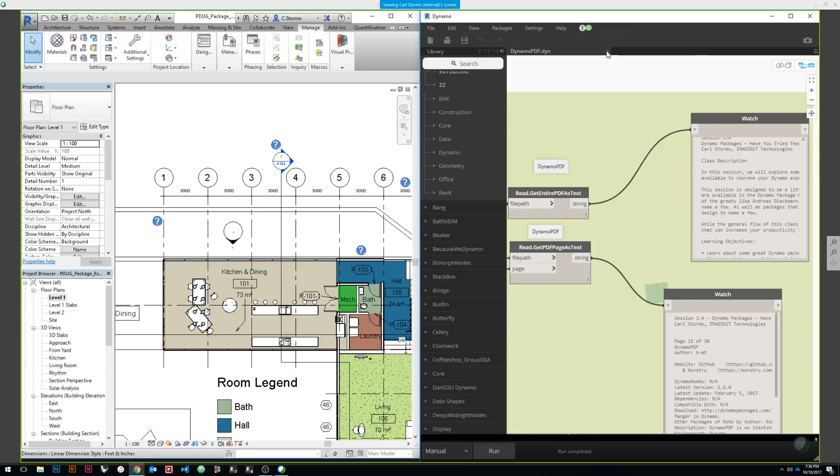If you work with Navisworks, then a must-have is absolutely Dynaworks. Dynaworks is a node that allows you to interact with Navisworks. Now, yes, I have to have Revit open because that's how I interact and get into the node, but it's actually playing with Navisworks. There are versions of this package for 15, 16, 17, and 18 versions of Navisworks.

The one I'm going to show you here was going to pop up and actually open Navisworks and allow me to work with it, then save the file out. But we can also pull in clash detection, see clashes, all that stuff with Navisworks. Simply just run this - it's going to actually start up Navisworks, pull it up on the screen, and I'll be able to manipulate Navisworks.

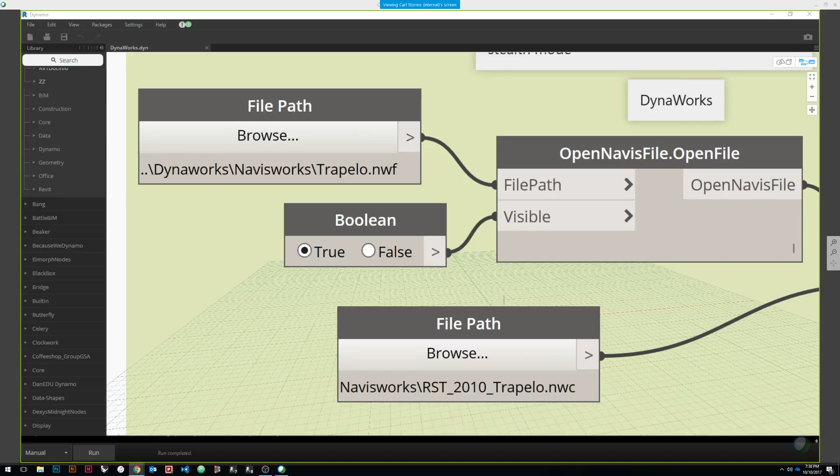And then it's going to save the file out as a different name in a different location. As you can see, I now have access to Navisworks, and it saved it as pdug NWF. If you look where it actually went to, it was called Trapelo NWF, and then it saved it out in a different location as pdug NWF.

Again, very tip of the iceberg, but if you do work with Navisworks, I highly recommend taking a look at Dynaworks. There's also the website and the Excel spreadsheet that I put together to go take a look at some of the demos that Adam's put together, the gentleman that created it.

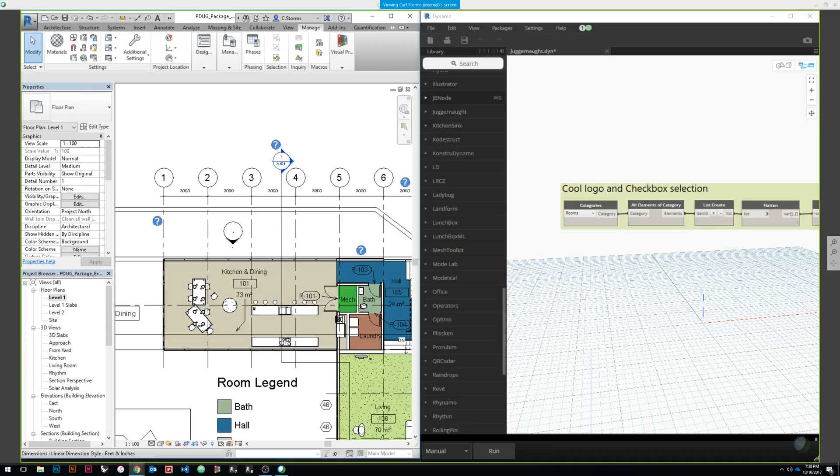This next package, Juggernaut, has some pretty cool stuff in it, but it also has the best logo of any Dynamo package out there. So if I scroll down to Juggernaut and open it up, anybody that follows the comics would know who Juggernaut is. I just think it's really cool.

More importantly, one of the things it can do is allow you to have checkboxes inside of Dynamo. Doesn't sound like a lot until you see what I'm about to do. When I pull this through, it gives me a visual checkbox. So I pulled in all of the rooms in my project, which gives me an output.

If I only wanted those 3, my list now includes just the ones that I've checked. So it gives you the ability to pull in information and quickly manipulate it with a simple checkbox. If there's a check, it shows up in the list. No check, no list. Very handy node to have.

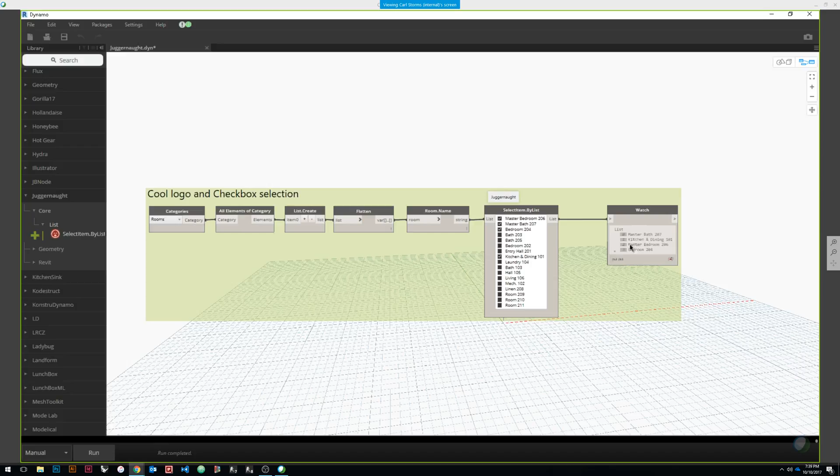Next one is Landform. If you do much work with landscape architecture, this node could be your new best friend.

The first one is a random math generator. It's a cool little node. If I select this, it goes through, does some random math for me, and starts at 3, goes to 129. I need 7 things on my list, and so it just randomly gives me 3, 74, 129, 125.

So if you think back to when we were talking about doing facades and you need randomly generated patterns, it's a quick little way to get some random numbering. In this particular instance, because the majority of the package deals with landscape architecture, this is randomly generating tree patterns for a lot.

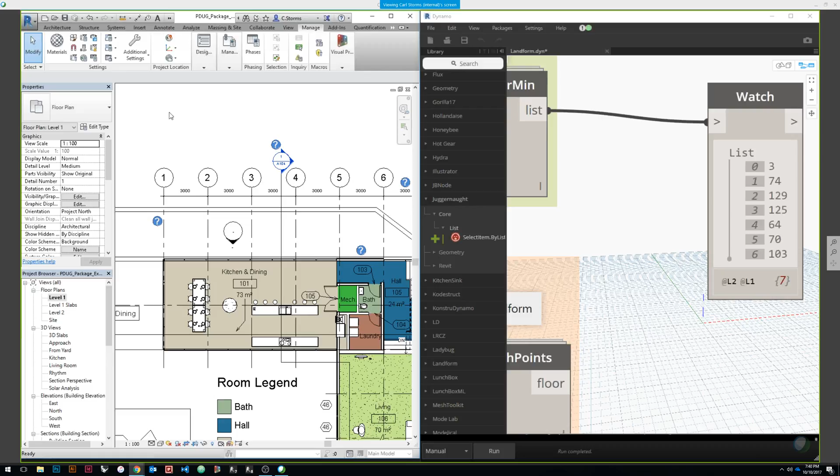The other thing we can do, and this is pretty cool, if you've ever run into this - if I go to the location, you'll see I have 2 slabs. Now I have to try to get them to meet, and if you've ever tried to make slabs meet or slope, you know it's not the most friendly interface. Never fear, Landforms has you covered.

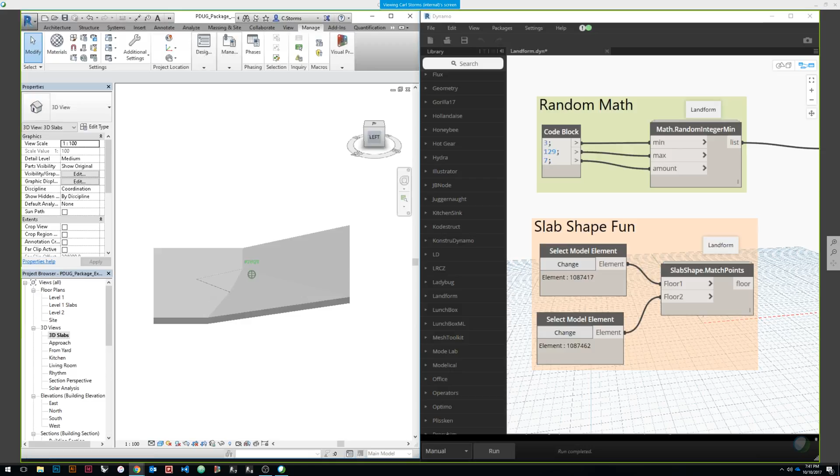So you select the elements that you want to match. Hit run. And we've now made it work. And if we were to do it the other way, top first - the first one you select stays, the other one comes to meet it. So you can see we did an up ramp instead of a down ramp. Very cool little process. It saves you a ton of time trying to work with ramps inside of normal Revit.

Next one is LRCZ, which is Living Room Craftz. It's a blog. My little name won't make any sense if you don't read Martin's blogs, but basically all of his blogs have to do with songs, usually 80s punk songs. So the fact that I named his graph after a Hall & Oates song, he would find amusing and upsetting all at the same time.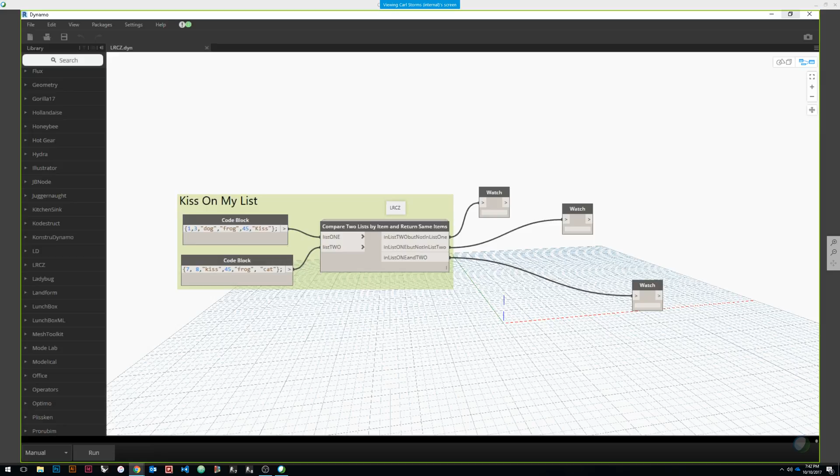What this simple node does is allow you to take 2 lists and compare what's in the first list, what's in the second list, and what's in both lists. If I simply run that, you can see in list 2 but not list 1: 7, 8, kiss, cat. List 1 but not list 2: 1, 3, dog, kiss. And what's in both lists: frog and 45. So again, if you're trying to compare and find out what's in lists, you can very quickly pull that through and see what's going on.

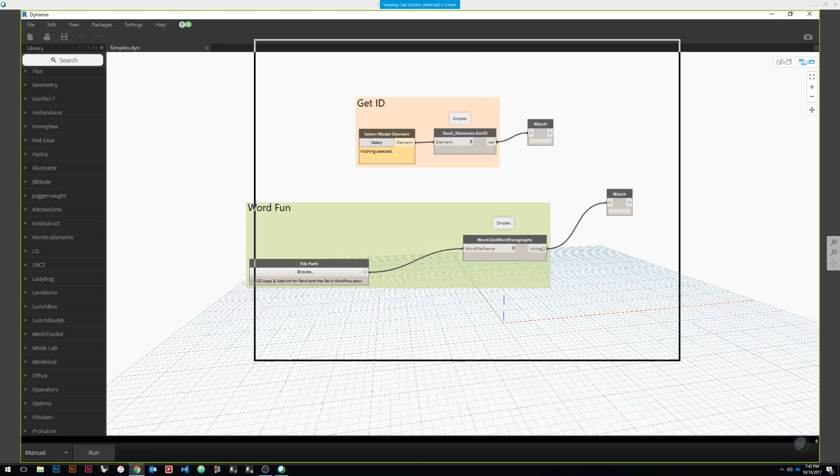The next one is a package by Marcello Sgambelluri. What this does is get you information, a few little things. One, it pulls out the element ID, and sometimes this is important when you're working with something and need to find out what the element ID is. So I can just very quickly select the element, and then it gives me the element ID.

We also saw earlier working with PDFs - this is very similar. It allows me to pull in information from an actual Word doc, so from a DOC or DOCX. So again, maybe you got your specs in a Word format instead of a PDF. As you can see, I browse to where it is, hit run, and I now have all of that information available to me inside of Dynamo in a string format.

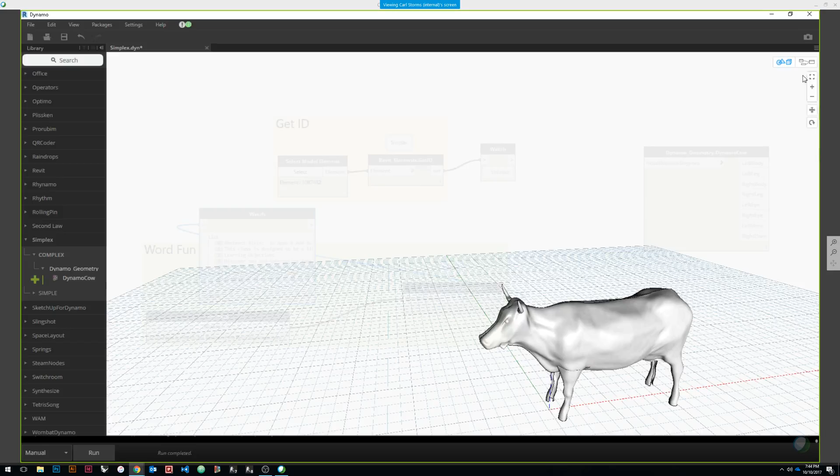Now, one other thing I can't not show when we're talking about Marcello's package - if I go down to Simplex, which is simply complex, we have simple, which are the things we are looking at, and then we have complex, which if I pull this onto here, is Marcelo's world-famous Revit cow, now dubbed the Dynamo cow. So as you can see, just by putting that on the canvas, I created a cow. And if I go back, I can adjust the rotation degree of the head.

No practical purpose, but when you have a Dynamo cow that you can turn its head, you just have to do it.

Getting close. Steam nodes. This is also one of the most downloaded packages, so it could definitely be one to throw in the essential packages. Some of the things we can do with the Steam nodes, we can align views on sheets.

I know I get a lot of people asking about that. So if I take a look at my plan here, you'll see I've got two views and where they're located. I go to my 103, you'll see where my plans are located. So I'm going to align these views. Now, if you're doing this in the real world, you would have a template that had your views in place. You wouldn't use one to do the other, but this will show the points.

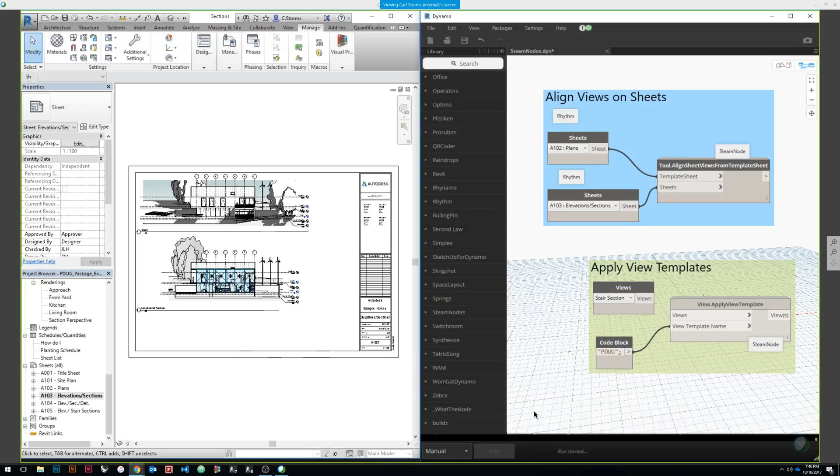You'll see how these will manipulate to mirror what I showed on the 102 page. And you can see they've moved to match what was on 102. It is working by matching the center of the crop region. So that's how it's done. It's not a corner. It finds the center of the crop region, and then it matches all of the centers for all the crop regions.

We've seen a similar version of this before. We can apply view templates. So if I scroll up and take a look at my stair section, you'll see what it looks like now. I'm going to apply my PDUG view template. Very quickly applied that view template.

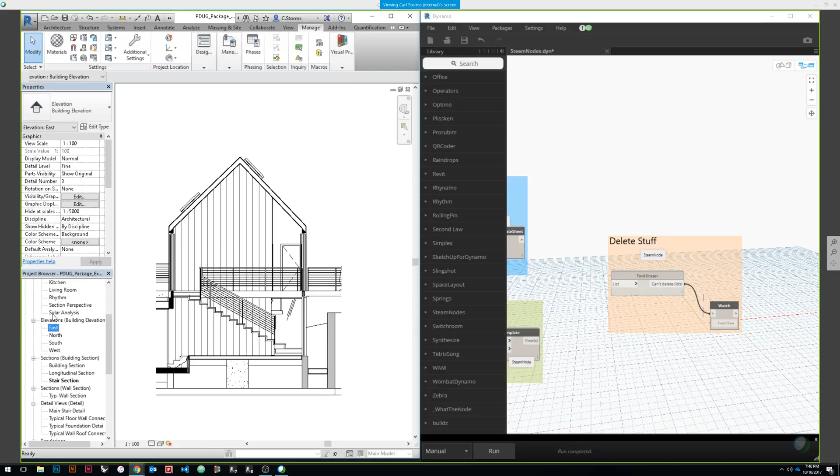And if we created something that we didn't want, we can also delete that stuff. And you'll see that my stair section has been deleted. And if something wasn't deleted, it pulls out a list to tell you what cannot be deleted. It doesn't seem like a big thing, but sometimes you have a lot of stuff that you need to delete. You can throw in a list of all the stuff that you've gathered that needs to be deleted, views, CAD views, things that you want. And I don't know if you heard me snap. I snap my fingers, and they're all gone and deleted out.

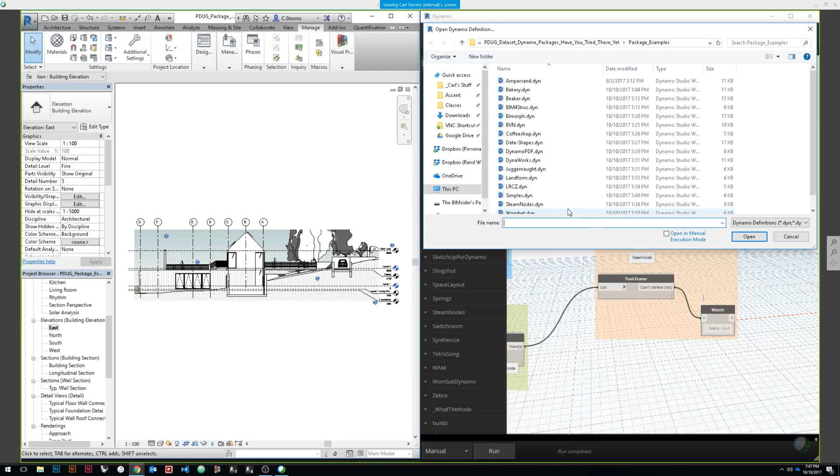All right, 2 more to go. Wombat. Yes, they all seem to have very interesting and strange names. Oh, I just forgot which firm it is now that does this. Doesn't matter. What these guys allow you to do is to change up a family type.

So if I go back into my floor plan, scroll in place, select my door, you can see it's clearly a double door. I can swap it out for a single. And you can see we've swapped that out.

Not a big thing. We can easily do that inside of Revit. But again, you'd think of the implications when you have to do that to 100 or 200 or 400 different doors, and the fact that we can do it very quickly using a package and a node.

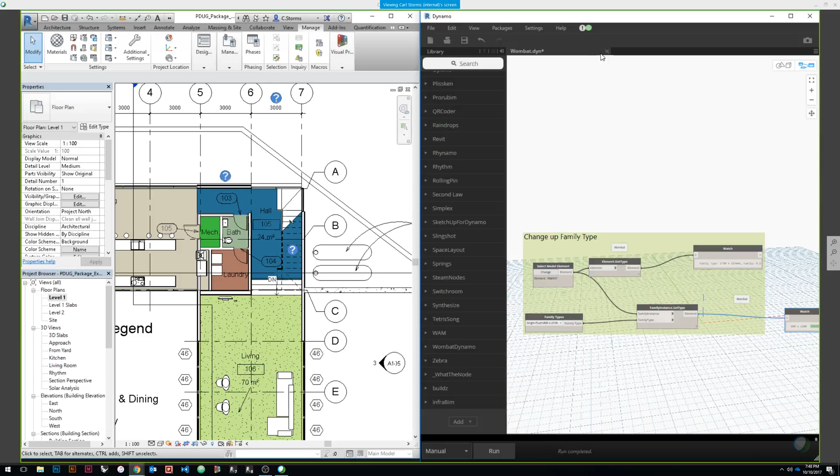And zebra. We have to end on a Z. A couple cool things we could do here. Sort room and level parameters. So this allows us to, and again, I'm just using rooms here, sort by a whole bunch of different things.

So as you see, I've got a bunch of rooms in my project, and I've got some different things here to sort by. So I want to sort by area. Now we've got all of our information, our rooms, the levels that they're on, and in this case, the parameter, which was area.

I switch that out for number, rooms, levels that they're on, level 1, level 2. In this case, the parameter was the number. We want to know some perimeter, area, level, perimeter. So it's one of those nodes that can be whatever we want it to be based on the information that we want to pull in.

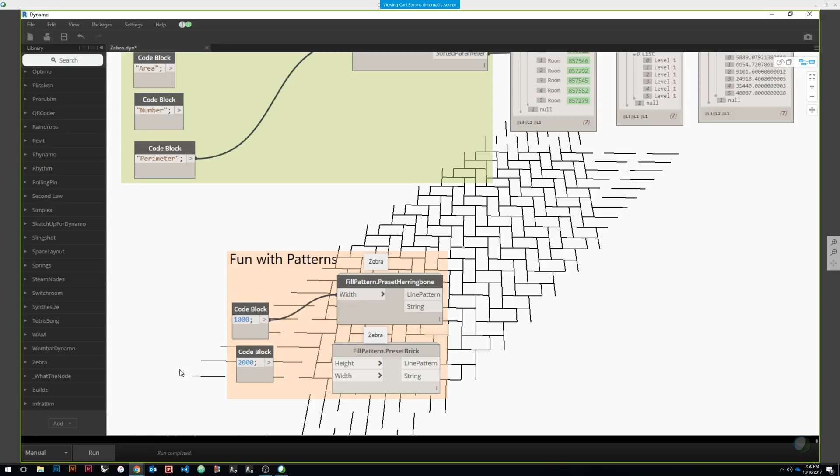With this same package, we can also create our own fill patterns. So if I want to create a herringbone pattern, I can create a herringbone pattern. If I want to create a brick pattern, I can create a brick pattern. Again, ways that we can do this and manipulate it inside of Dynamo.

And I know that says it, but I do have one other one real quick. And it wins for the best name, especially if you're a fan of 80s rock-ish. If you know Dexy's Midnight Runners, this is Dexy's Midnight Nodes. And it also has some pretty cool things that we can work with.

Now, I don't have an actual definition like I did with the other ones. This is a package I was putting together, some information I was putting together to be able to change the line types inside of a project.

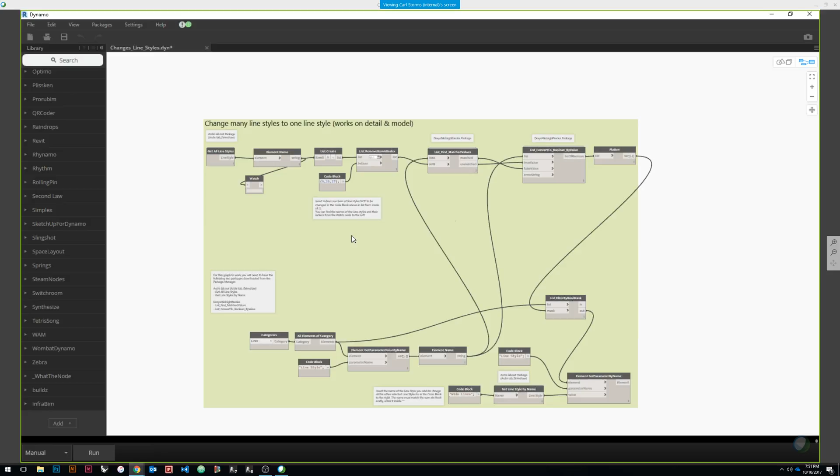The cool things that come from the Dexy's Midnight node are a couple things. One, it allows me to match lists—what comes from list A and list B, what's matched and what's not matched. And then it also allows me to convert Booleans by value. A lot of times when working through Dynamo scripts, we end up with trues and falses, and that's how we run things. If it's Boolean, so if it's yes, then we get this information. If it's no or false, we get this information. This allows us to choose what information is true and what information is false based on our lists.

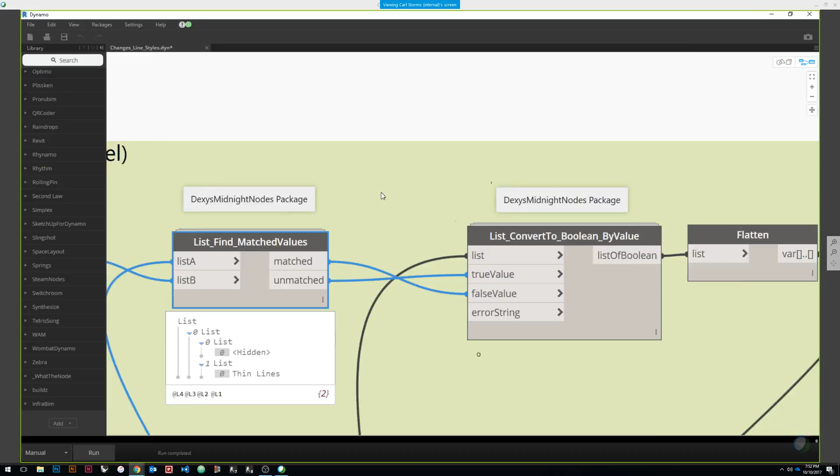You see we got trues and falses. We've got all of our lists hidden and thin, and it comes on through. This particular example is meant to change line types inside of our project here. So we changed a bunch of line types from thin to thick. But the idea here, aside from the coolest name, was to show these very useful nodes that exist inside of Dexy's Midnight nodes.

All right, so that is our whirlwind tour. Before I get into talking about package management, I'm going to take a break and see if we have any questions on all of that goodness we just went through.

I wanted to ask about—earlier you were talking about... and you were talking about... Carl, do we still have you? Yeah, I'm still there. Could somebody repeat the question? Yeah, sorry, you were talking about Beaker and filtering, and does that filter more specifically than categories?

I kind of missed what you said on that, and I felt like maybe you said it filters more specifically than categories—like you can filter specific families. Let's just open it up again and take a look. But yes, it does give you more flexibility with your sorting, or filtering in this case.

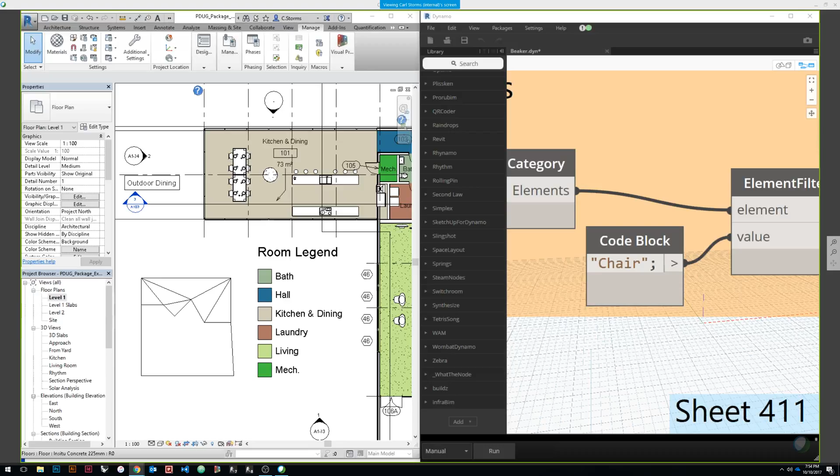And the way it comes through is because we're pulling through categories. So we're filtering based on a category, but then we can filter pretty much whatever we want from that. We create a big bucket, which is the category, and then we can filter by whatever we want. As you can see, I just randomly chose chair. But then the node will accept any list of elements, correct? It doesn't have to be gathered by category, it could be gathered any other way. Just as long as it comes in—as you can see, it's looking for an actual element—so as long as it's an element, it'll accept it. That's correct.

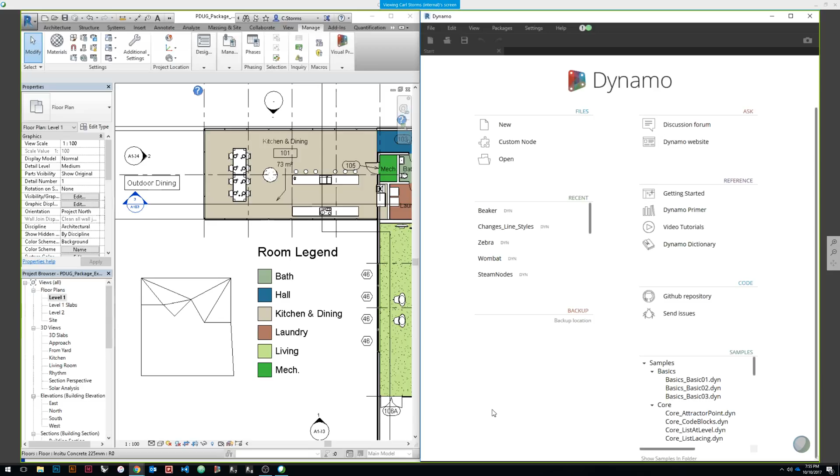So that node automatically creates a prefix when there's two openings inside of a room? Sorry, I missed that—it does what when there's two openings in a room? It adds a prefix to the door number, sorry, when there's two doors. That's correct, and in this case it's automatically 1, 2, 3, 4. Can it differentiate between the to-room and from-room? It does not, at this instance. So yeah, at this moment, it's just two rooms.